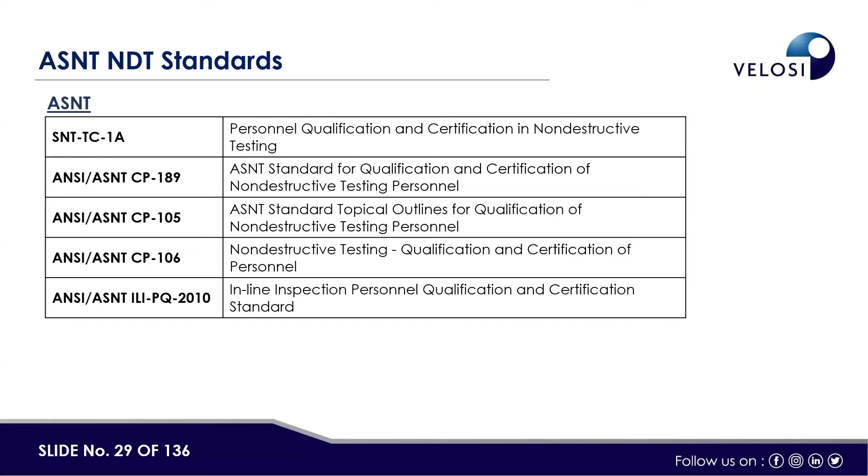And the qualification and certification standard is covered by CP 106. And inline inspection personnel are qualified as per ILIPQ 2010. So these are some of the standards from American National Standard Institute and American Society for Non-Destructive Testing. Basically, they cover some topical outlines and criteria which govern the training and certification of the people who are going into the industry performing the testing on different and various techniques.

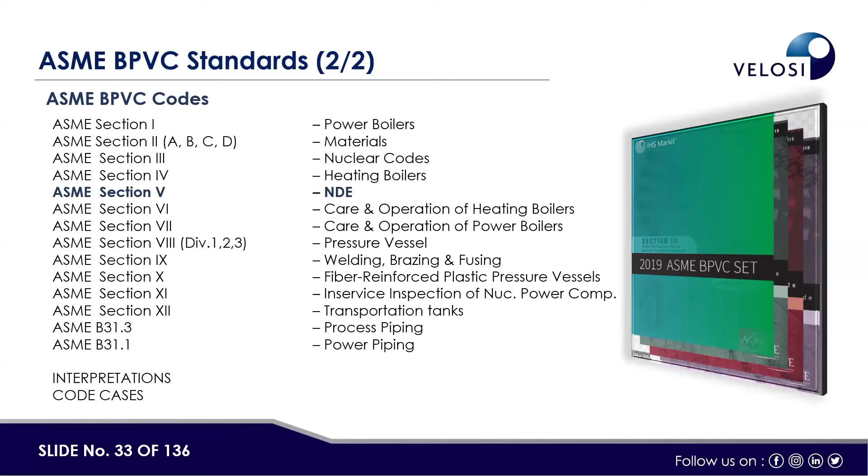Section 9 specifically deals with the welding, brazing, and fusing processes. Section 10, fiber reinforced plastic pressure vessels. Section 11, in-service inspection of nuclear power components. And Section 12, transportation tanks, and B31.3 is for process piping, and B31.1 is for power piping. There are 11 or 12 different standards involved in the B31 series. They all cover different aspects of the piping system.

There is a general overview for Section 5. We will go through this. Section 5 specifically deals with the routines and, what would you say, regimes of different non-destructive testing methods. Non-destructive testing, as you might be aware, or I'll try to enlighten you, deals with some physical phenomenon which we try to use to our advantage without destroying the test object's future usability. So whenever non-destructive testing methods, which are various in their application, definition and types, are used in the industry, they are governed by ASME Section 5, as we will go in detail later in the session.

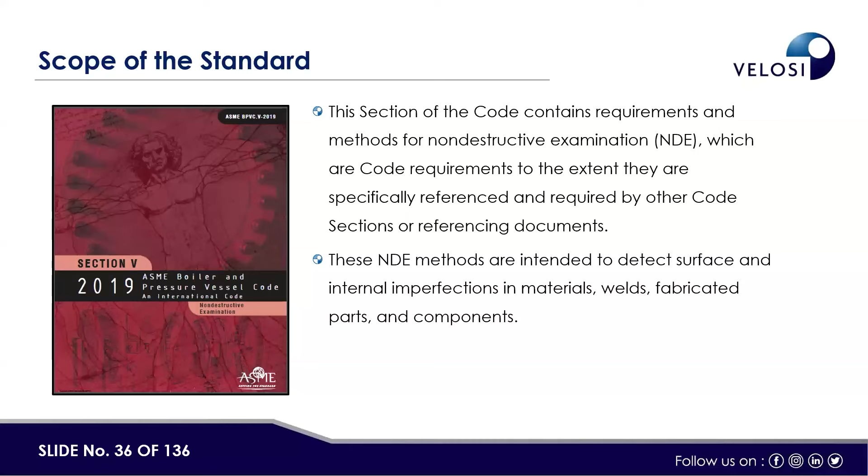Some of the well-known non-destructive testing methods which you might have heard about already in the industry are acoustic emission, adaptive total focusing method, ATFM, which is a subpart of PAUT nowadays, or you can say an associated technique, which is very advanced and very latest. AUT is automated ultrasonic examination. ECA is eddy current array. This is comparatively new also. EMUT, encoded manual ultrasonic examination. This is normally routinely done in every part of the world.

Electromagnetic eddy current testing. This has various further branches also. Leak testing, like you guys must have seen vacuum box testing or hydro testing. These are both part of leak testing. MT is magnetic particle, NDE is non-destructive examination, PT is penetrant testing, RFT is remote field testing, RT stands for radiographic testing, ultrasonic testing is denoted by UT, and visual testing is denoted by VT.

Acoustic emission is the class of phenomena whereby stress is applied to an asset, like a tank or pressure vessel or LPG bullet or LPG sphere. When an asset is under operation or in service, there are certain stresses involved, and those stresses, when they transit, generate ultrasonic waves, which are turned into audible sounds by using different equipment. This whole phenomenon, when applied in the industry for detecting those emissions generated by an asset under stress, is called acoustic emission testing.

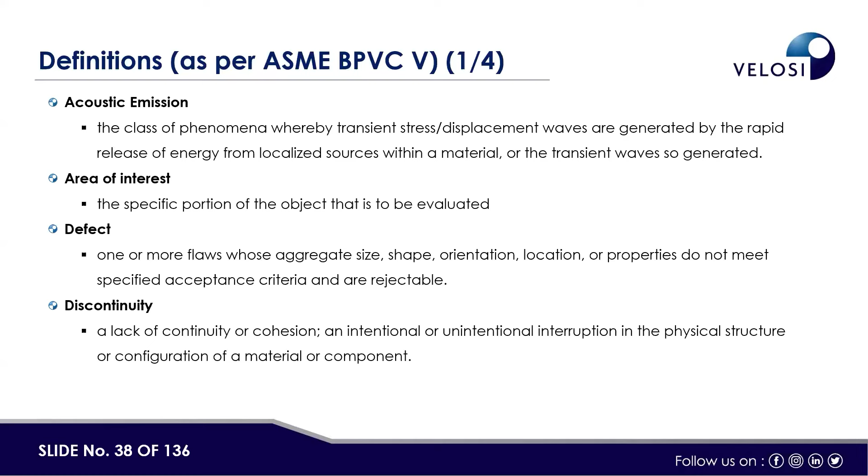Eddy current testing is a non-destructive test method which uses the current induction principle, which we will explore later in the presentation. False indication could be a result of the behavior of any test object, or its properties or its characteristics, with the medium of the test which is being used to identify some of the properties. This interaction generates some indications which are not actually coming from a discontinuity, but rather from the geometry or properties of the material. So these indications, when evaluated, are classified as false indications.

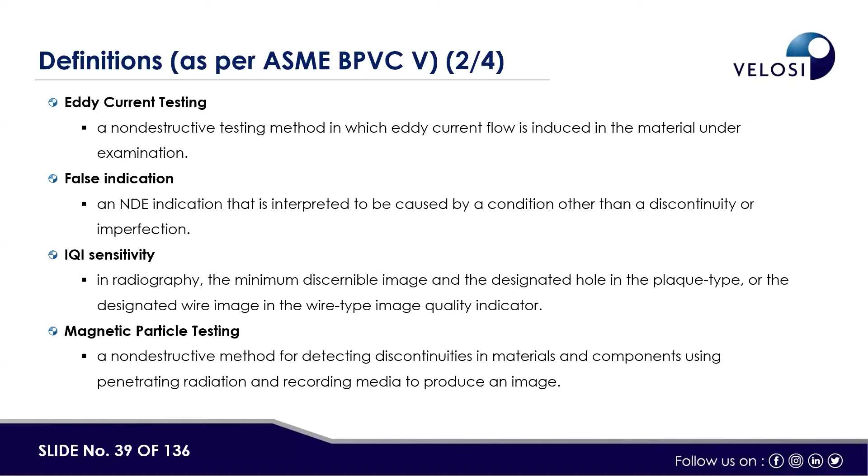IQI sensitivity: in radiography, image quality indicators are used to identify the quality of the image being generated by any radiograph. Magnetic particle testing is the use of magnetic properties of a material to detect any discontinuity or defect in it. Time of flight diffraction is a testing method in which we use high frequency ultrasonic waves, and the time it takes to transmit from one end of the object to the other and come back is the total time of flight.

Ultrasonic is a form of mechanical vibrations which we use in higher frequencies to test objects. Visual examination is to see an object to evaluate its condition. It's a visual examination. So I hope you guys are alongside with me until now. We are trying to dive deep into the subject from here on with an introduction.

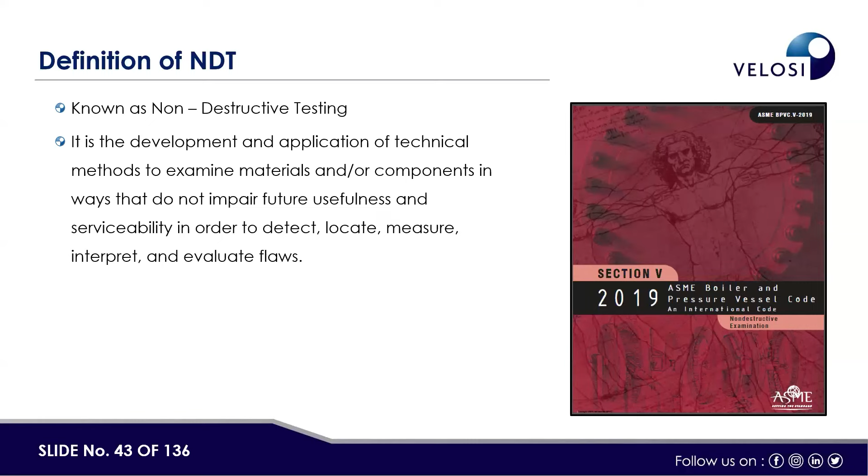Definition of non-destructive testing. As I have earlier touched the subject a bit, when we test a material or a component to ascertain its future usefulness and to assess its properties without destroying the test object itself, and also without disturbing its future usefulness. Any method of testing which fulfills these different criteria already laid out has to be classified as a non-destructive testing method.

When is NDT needed? In my humble opinion, NDT is needed in the entire life cycle of any given asset. From the raw material stage in the mining industry, we need to assess the quality of the ore or the raw material, as this will govern the quality of the end product. So we use non-destructive testing methods to ascertain the quality of the ore or raw material. Then that ore goes into primary processing, or primary steel making. In the process, we apply non-destructive testing methods to ascertain the quality of the primary product, which would be raw steel, ingot forms, slab forms.

Then those primary products go into the secondary processing industry: rolling, forging, casting industries. There, non-destructive testing again comes into play to ascertain the quality of the product and to ensure that no flawed product passes the assembly or manufacturing line. Then those secondary products are formed into the final product, into plate shapes, girders, slab shapes, and various other forms, which are used in the oil and gas industry to manufacture tanks, pressure vessels, piping, and other valve assemblies, and also the structure of the plant, which holds everything together.

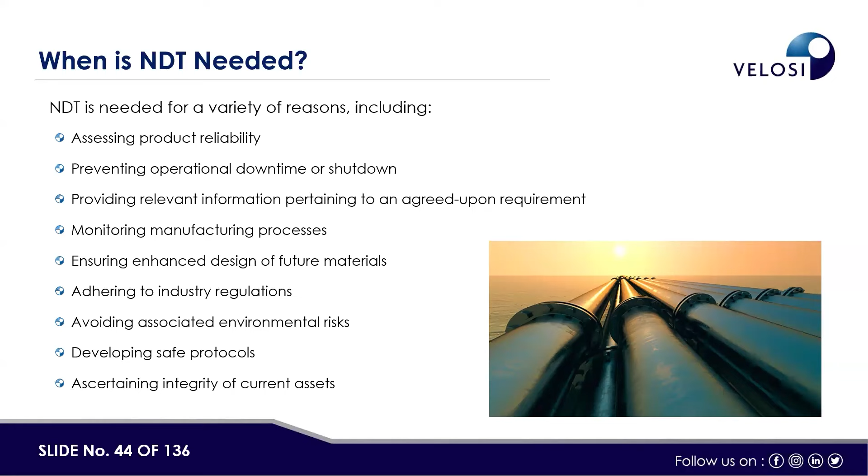So, in my humble opinion, non-destructive testing methods play a very vital role in every step of the life cycle of any given product. Their usefulness begins from the raw material till the finished product, and then back again when the product completes its life cycle. It is turned into scrap, sold and reprocessed again, and the life cycle begins again. So there is involvement of non-destructive testing in every phase.

Industrial application of non-destructive testing: as we have touched already, it's applicable in the mining industry for ascertaining the quality of the ores and raw materials, and the oil and gas industry, where we use it to test and ascertain the health of oil and gas assets like pressure vessels, tanks and piping, etc. It is also used in the energy sector, power generation sector, aerospace industry, heavy engineering complexes, and automobile industry.

Importance of NDT in asset management. So the importance of assets and asset management: how non-destructive testing plays its important role in managing the asset life cycle. When we operate oil and gas plants, we know there are multiple assets involved, and during the process, we tend to get aging of the assets and also service-induced defects. So if we run our assets to failure, it will have a very adverse effect not only on the operational efficiency but also on the life of your plant.

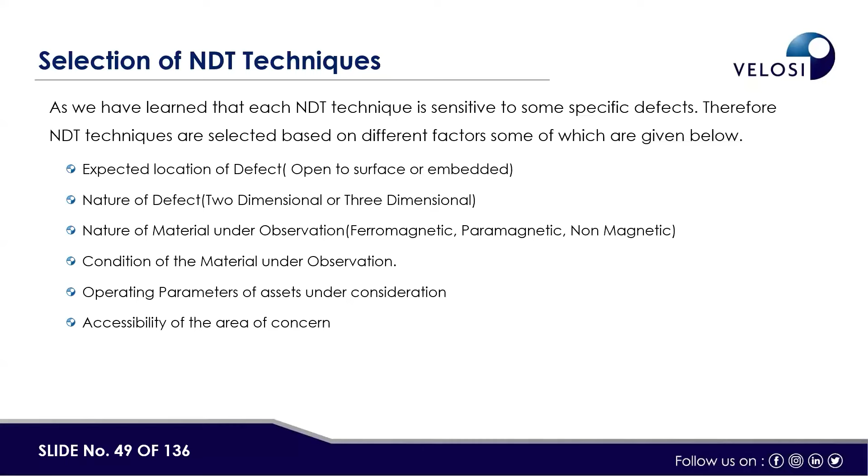What are the different advantages of non-destructive testing methods? As we have gone through already some of the key points, in the majority of testing conditions, we do not have to take the asset off stream.

It remains on stream, and we can test it without any adverse effect to the results being produced. It can help you plan your shutdowns and reduce your shutdowns. How can it reduce your shutdowns? It can plan your maintenance work before. You know the condition of your assets beforehand, so you can plan your maintenance runs accordingly. So no surprises in terms of failure of any asset, in terms of leakages being observed unknowingly, unplanned, and shutting the plant down for maintenance work.

So it can reduce the downtime of your assets, because now you can have planned maintenance, safety of the assets and the operators. If your assets start to fail without warning, or without you knowing prior, those are not only dangerous for the production, for the asset, but they are also dangerous for the operators which are operating in the near vicinity.

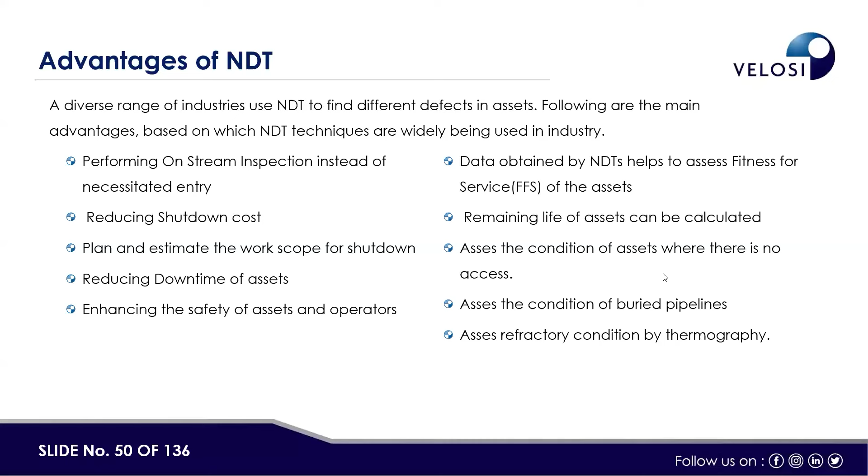Okay, let me get through this. Limitations of non-destructive testing techniques. As I have already touched the subject, there is no non-destructive testing technique in the world as of today, I know, which could claim that it can provide answer for every situation. This is the first and foremost reason why there are so many non-destructive testing techniques available to select from, because every technique has its own set of applications and its own set of limitations.

So when we sit on the chair and try to make decisions about how and what we need to do when it comes to non-destructive testing methods, the questions we ask ourselves, we have already gone through them. Those are the questions we ask ourselves because there are so many techniques available. So sometimes the questions we ask ourselves are more of the economics part than the technical part. So the economy of the testing is a very major factor also. If a condition could be tested very economically with a very simplistic approach and very conventional method, it is not absolutely necessary to go with advanced NDT techniques.

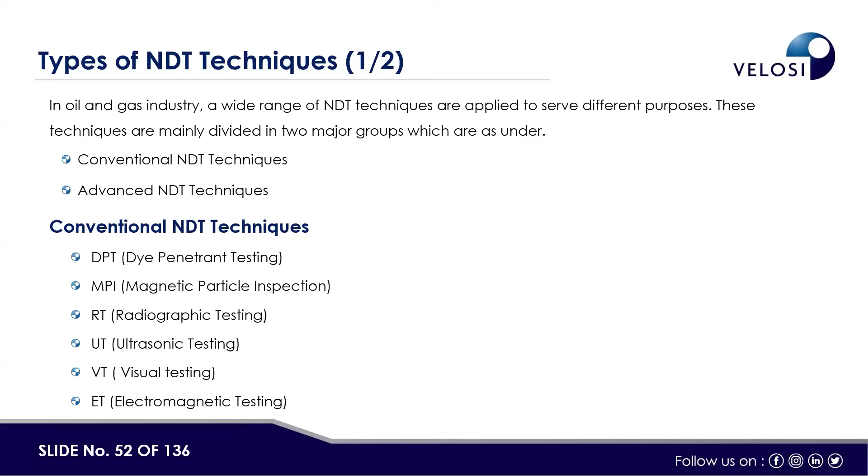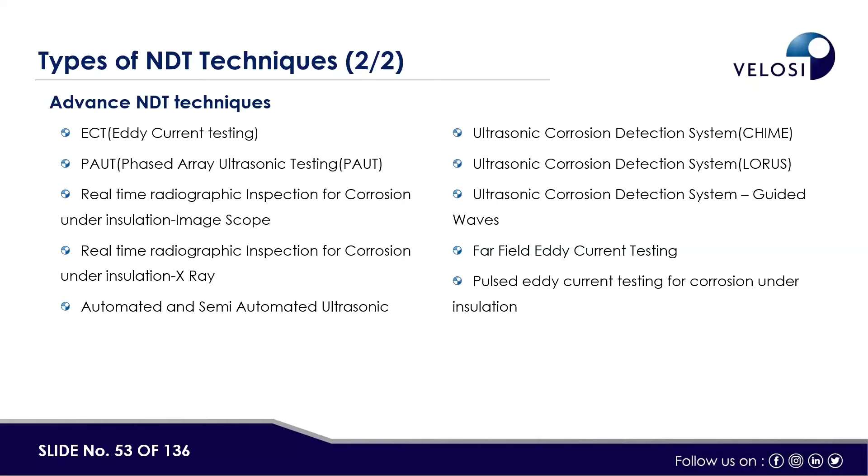And in advanced NDT techniques, we have eddy current testing, and we have phased array ultrasonic testing. We have real-time radiography. We have automated or semi-automated ultrasonic testing. We have CHIME, which is creeping head wave inspection method. We have LORUS. We have guided waves, alternatively also known as LRUT in the industry. We have far field eddy current testing. We have near field eddy current testing. We have so many other non-destructive testing techniques which we will go through today.

So the conventional part: dye penetrant testing is the simplest of them all. It is actually a direct aid to visual inspection, which we are all aware of. When we visually assess the condition of any test object, like wear, tear, misalignments, very large cracks, paint removals, blistering, these sorts of findings we usually detect and evaluate based on visual observations.

But sometimes we need some help to enhance the visibility of any given situation or any given indication or any given discontinuity. We suspect it to be present there, but we are usually unable to resolve or visualize it very visibly. So we need an aid, a help from a testing technique which would enhance its visibility, which is the specific case for dye penetrant testing. It's just an aid to visual inspection. It just helps very small defects to be seen, or their visibility to be enhanced, to be seen easily.

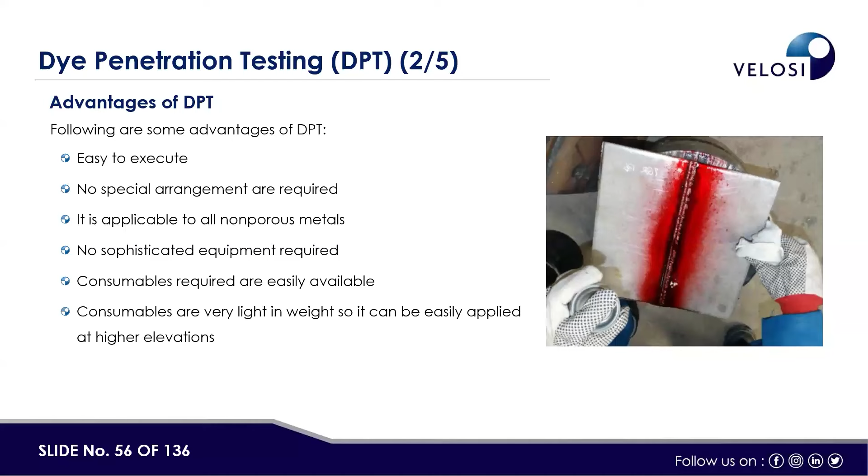It is very easy to execute, where no special arrangements are required. It is the simplest of non-destructive testing techniques. So the training required for getting certified and acquainted with non-destructive testing like DPT is very little. Regulations are not that strict. It's easily doable. No special equipment is required. It is a very mobile, portable test instrument. You can have three or four cans alongside, and you can take them anywhere you want. It's also easily available, and very cheap to be done. So these are some of the advantages of this non-destructive testing.

There are also some limitations: this method cannot be applied to porous material, as it would trap your penetrant and render anything present unseeable, unresolvable. Surface preparation required is at times, not always, very extensive. Consumables which are available are highly flammable. They are usually available in the form of an aerosol can. And you also need to provide proper ventilation if you are doing this in confined spaces, as the consumables are also rated as carcinogenic on their labels. So you have to take some safety precautions for yourself.

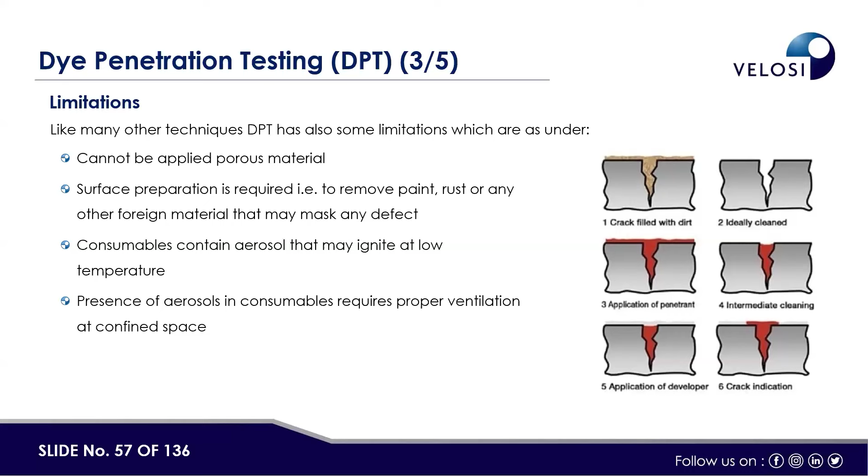You have to cover your breathing orifices, so that you do not inhale these consumables, and you also have to cover your hands and skin so that you do not come in direct contact with the consumables. Otherwise, it's very safe to operate. Dye penetrant testing is very reliable to detect surface defects, those discontinuities which you are trying to detect through application of dye penetrant testing, or liquid penetrant testing as it is alternatively known. It depends on the location of the defect. So the probability of detection for liquid penetrant testing is directly dependent on the defect's openness to the test surface.

If the defect is not open to the test surface, DPT might miss it because it needs an opening to penetrate. If that opening is not there, DPT remains of no use in that situation. So if the defect is open to the surface, and the test object is not porous so that it may absorb the penetrant material, your probability of detection for dye penetrant testing would be highest.

And if your defect is not open to the test surface, the probability of detection for dye penetrant testing will remain at its lowest. So, as I have already told you, the accuracy or probability of detection for dye penetrant testing relies on the condition of the test object, specifically whether the defect or discontinuity is open to the test surface or not.

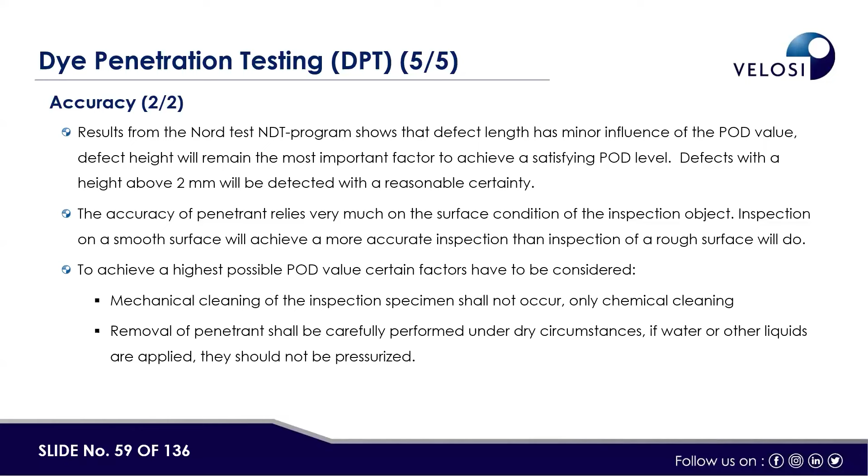Radiographic testing is most widely and commonly used, and it's one of the oldest testing methods in the industry. Usually it is used to detect cracks, trapped air which is called porosity, foreign inclusions, thickness measurement, and profile radiography. These are some of the key applications of radiographic testing, but let me tell you, this is not where it ends. These are some key applications.

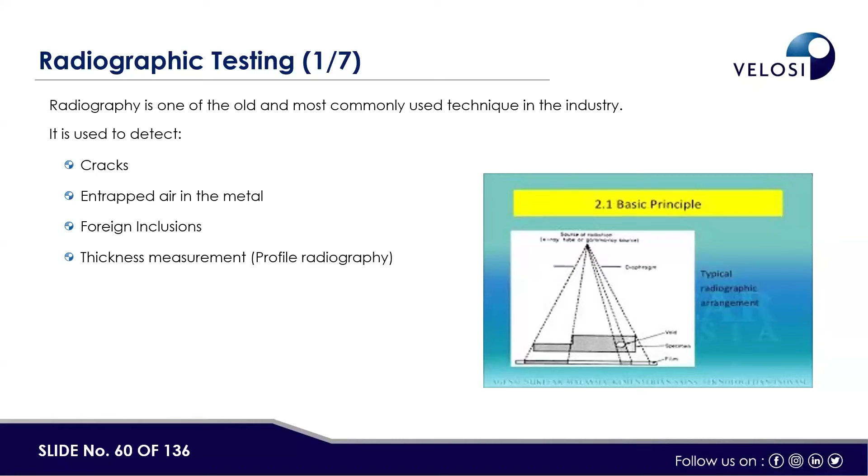Radiographic testing uses some sophisticated tools, as we have seen in case of dye penetrant testing the need for tools is not very much. So when the need for tools is removed from any testing regime, it becomes less costly. The more tools are involved, the more the cost goes up. So the economy of any testing depends on how many different tools and consumables are being utilized to get the result. One key consideration when deciding which non-destructive testing method to apply is the economy of the test. If it is too costly for getting results, it would be of less utility.

RT uses radioactive sources. Radioactive sources could be naturally occurring, in the form of cobalt or iridium-192. There are different naturally occurring radioisotopes used in the industry, and also artificially generated X-rays, produced using X-ray tubes. Then we need X-ray films which get exposed from the X-rays and generate a counter image or mirror image of the object being tested. Then we need IQIs, which are image quality indicators. Then we need densitometers to ascertain if the density of a radiograph is achieved or not. Then we need film viewers to view those X-ray films for evaluation and interpretation.

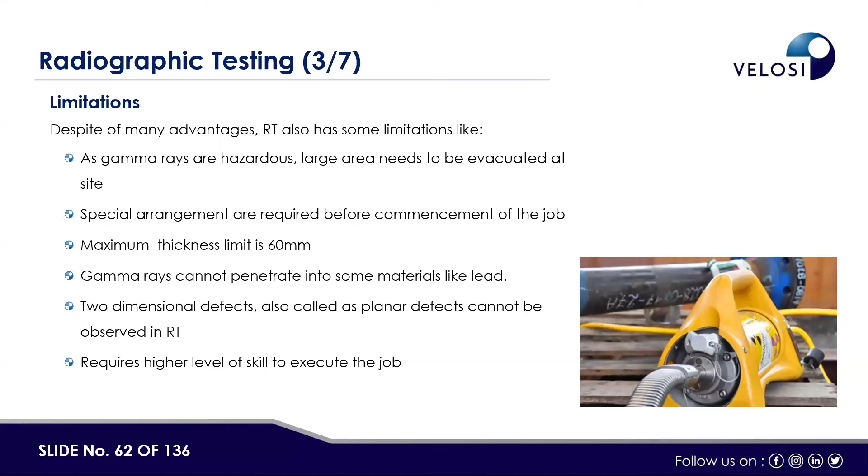It is a tight walk. So to walk this tight walk, we need very skilled and very trained operators to handle these sensitive equipments and to carry out these sensitive jobs, which is oftentimes not permissible in certain situations. So there are other test methods to be considered.

Accuracy or probability of detection - as we have gone through the applications and limitations of radiographic testing, we have come up to some limitations which depend on the density of a given material to be tested. In terms of thickness, we have seen there are some limitations. In terms of application, we have seen there are some limitations. So whenever a set of limitations is introduced into the testing system, the probability of detection goes down.

In case of radiographic testing, generally 0.3 millimeter can be detected using conventional radiography in steel. But it depends upon the wall thickness, it depends upon the density of the material, it depends upon the geometry of the material also, it depends upon the content of the object also - if it is filled or empty, and if filled, what it is filled with, what is the density of the medium.

The type of defect you are trying to detect is the primary question, as we have spoken already. It is all important to know if it could be detected with radiography or not. So the primary question when we ask ourselves what method is to be applied is what are we trying to look for. If we are looking for some shallow defects which are open to the surface, very fine, and it's a very dense material and very thick material, naturally we would refrain from going to hit it with the radiographic source.

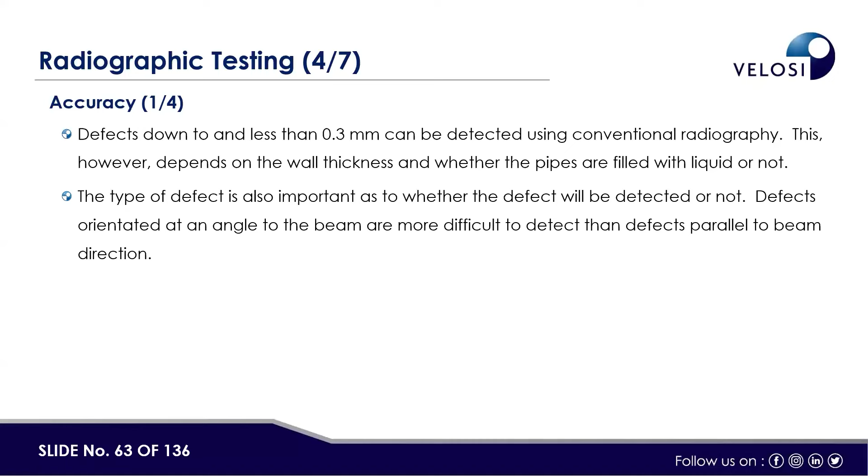The very important thing to know is there is no single technique in the world which can answer every question. So you have to ask yourself, what are we trying to look for? What are we trying to find the answer for? That question would bring up most of the answers itself.

So again, the POD curve for radiographic testing goes down with the density of the test object, the thickness of the test object, the radiation frequency you have got - either it's X-ray or gamma ray - and the radioactive source also, either it's IR-192 or cobalt. So there are many different factors to consider before providing a judgment upon probability of detection on any given NDT technique.

In case of RT, it depends upon density of the material, thickness of the material, the material itself, what you are trying to find out, and what the specs require you to achieve in the first place. Either you can achieve it successfully or not, either you are able to protect yourself from excessive exposure to ionizing radiation without compromising the quality of the test. So these are some of the factors which determine the POD for radiographic testing.

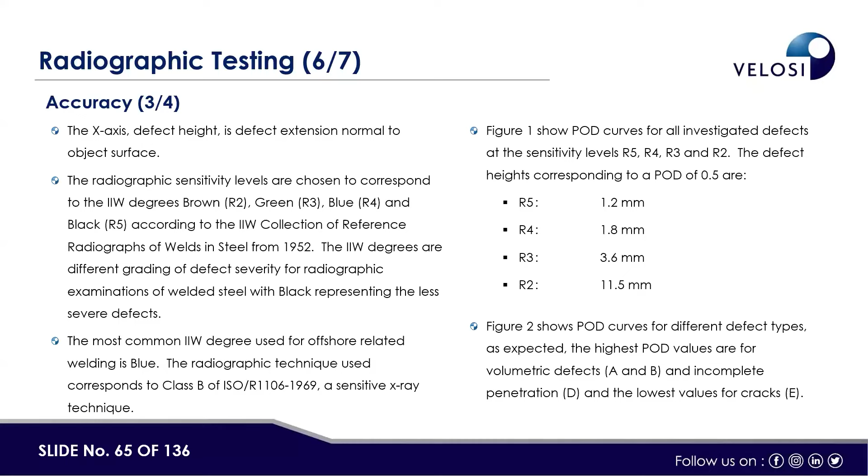And these are the explainers for those POD curves. These are different situations being posed to the radiographic testing regime, and the probability of detection with the change of one single parameter - the change in the probability of detection - is being explained here in this slideshow. You can refer to it again.

To achieve the highest possible POD value, as you have already gone through the subject, you need to have a certain set of information predisposed to you before you get to the testing job. If the acceptance criteria is very strict, you will have a higher reporting level. Obviously, the more indications you record, the more you have to report, as the acceptance criteria requires it. Again, as I have told you already, it depends upon the specifications you need to follow, and it depends upon the film quality required.

And the specs require you to maintain a certain degree of density without compromising the visibility of a certain diameter of wire in a given IQI. If those specifications are very strict, it becomes even more difficult. Also, the type of radiation being used, and the object under test.

So this slideshow tells you the amount of restrictions and limitations you add into the testing system - its POD will go down with each introduction of every limitation. So if you are adding limitations fold by fold, the POD is going down fold by fold.

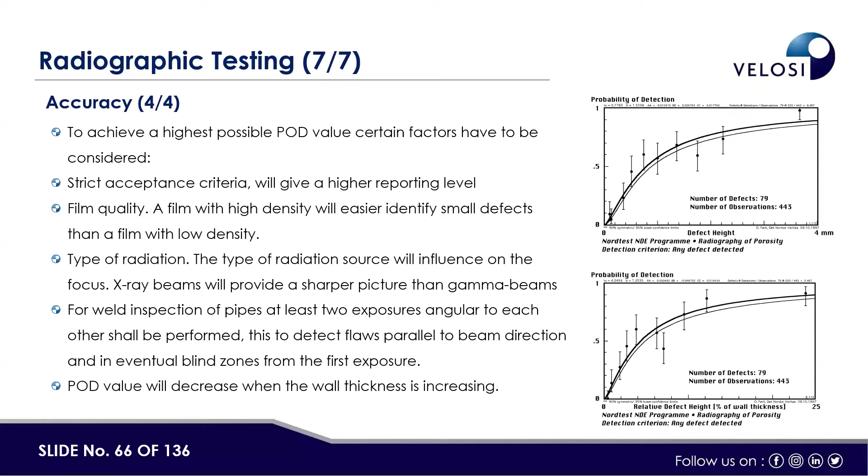Now, our next testing technique is magnetic particle inspection, MPI or MT, as alternately known in the industry. It is one degree above dye-penetrant testing in terms of simplicity - or you should term it below, because it involves some degree of equipment more than DPT involves. So it gets a bit more complex and compounded. It requires a greater degree of training to handle, because of the involvement of some specialized equipment to be used.

So we induce magnetic flux into a ferromagnetic material. That magnetic flux tries to flow through the material, and given the permeability of a given material is uniform within the material, if there is some resistance to that permeability or resistance to the flow of the magnetic flux, the flux lines would try to bend their path to choose the path of least resistance around that resistive boundary.

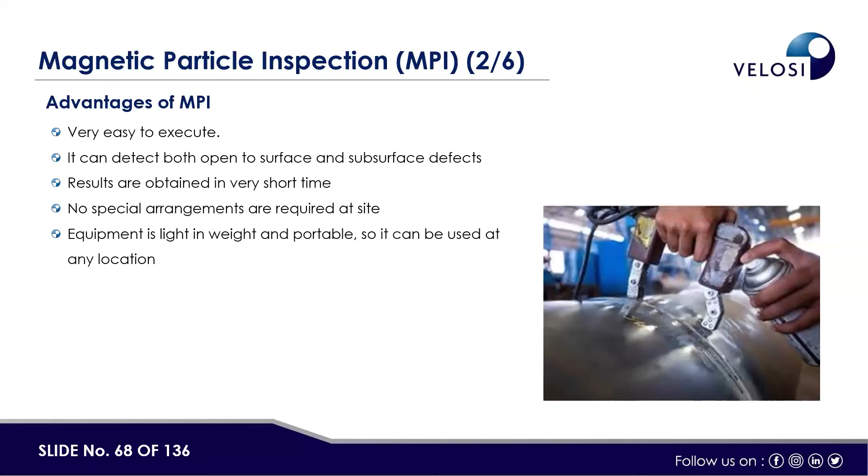There are also some limitations associated with magnetic particle testing, as there are advantages. Calibration of the instrument is sometimes required. It can test only ferromagnetic materials, as you need a material which responds conducively to an external magnetic source. The operator needs to be skilled not only in operating the equipment but also in evaluating the findings you get from MT.

Surface preparation is oftentimes required, but it is not as strict as it would be for dye penetrant testing. You sometimes need to remove layers, if present, which could interfere with the propagation of magnetic flux into the object. If electroplated objects are to be tested, you might need to remove the electroplating first. And as we have already discussed, in certain situations you might also need a power supply on site.

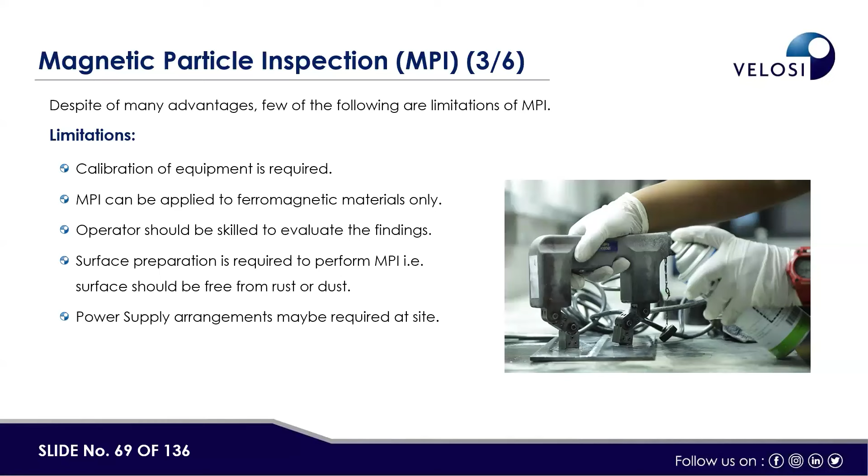So the POD, again, is dependent upon the mix of advantages and limitations present on that actual work day, on the actual test object. If it is more prone to the limitations, then POD goes down, and there is no point in using a technique which has very limited POD for a given situation. If the number of limitations present on site or on the test object is very low, then the POD goes up drastically.

So as with any other NDT technique, the POD for MPI is dependent upon the mix of application advantages and limitations available to you on the day, with that object under testing. That would determine what actual POD is available to you to operate with.

The ability of detecting defects depends on two major variables: the depth of the defect, as induced magnetism does not usually flow very deep into the test surface; it sticks to the surface it is induced from. And defect length. Regarding defect height, some specifications tell us that if a defect is more than 2.5 millimeters deep into the ferromagnetic material, you cannot detect it using MPI.

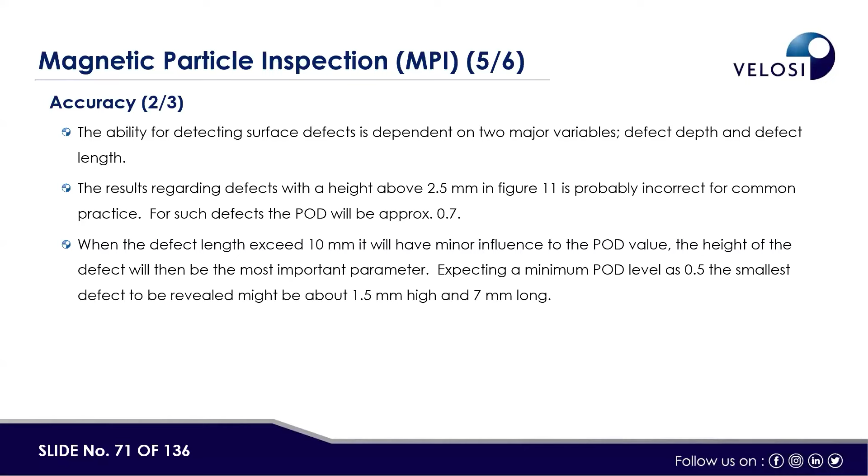If defects pose very little resistance to the flow of magnetic flux, you might lose them. If the defect is oriented parallel to the direction of the magnetic flux, you might miss it. So POD depends upon multiple parameters. It is not a simple number to write somewhere. It has to be calculated for each given situation on the day.

So as an example, we have provided you with one situation and calculated its POD. But for any given test situation, you have to go through and calculate and estimate the POD for that specific test object on that specific day with your specific set of equipment.

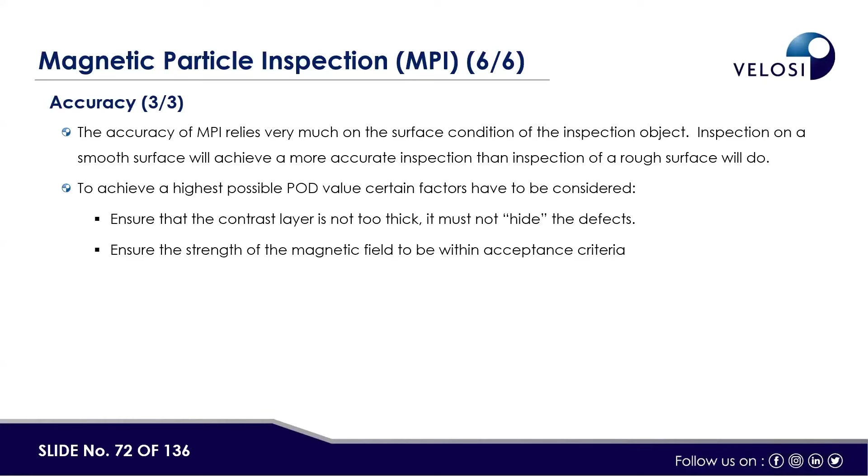So, gentlemen, we are through to 73 and almost halfway, including Miss Aisha's intro also. So I'll take the credit for coming to the halfway myself.

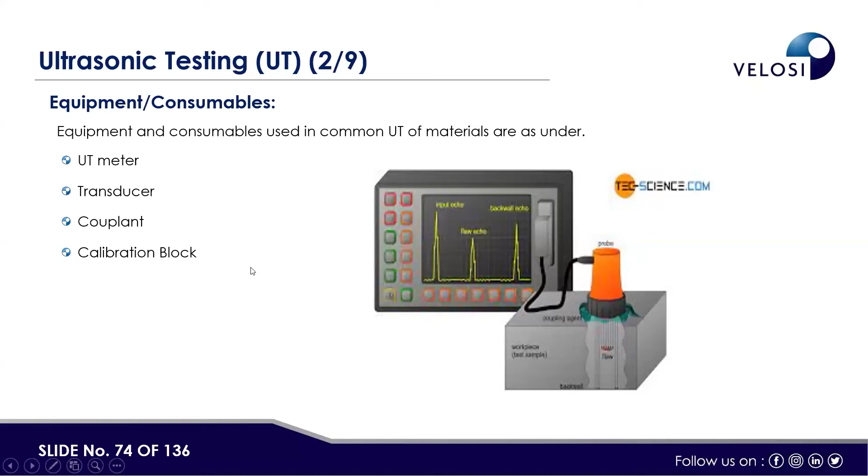Advantages of ultrasonic testing. It can be almost applied to any metal or any material. If I say any material, that would not be that far off from the reality. UT works equally on high temperature surfaces, but obviously with some precautions. UT has working range in terms of thickness of material, yes, but with some certain tweaking of the package.

UT can effectively identify in a three-dimensional plane. Yes, RT cannot provide you with the information regarding the height of the defect, but UT can. UT can be deployed to verify or to counter check performance of other NDT techniques also.

Results are readily available, or I must say the results are real time actually, as the decision is being made on the spot. The equipment is very safe to operate. It has no ionizing radiation. It is battery operated, compact, very mobile, very handy to carry around. So it is very friendly to operate in field activities and very friendly to operate in remote locations.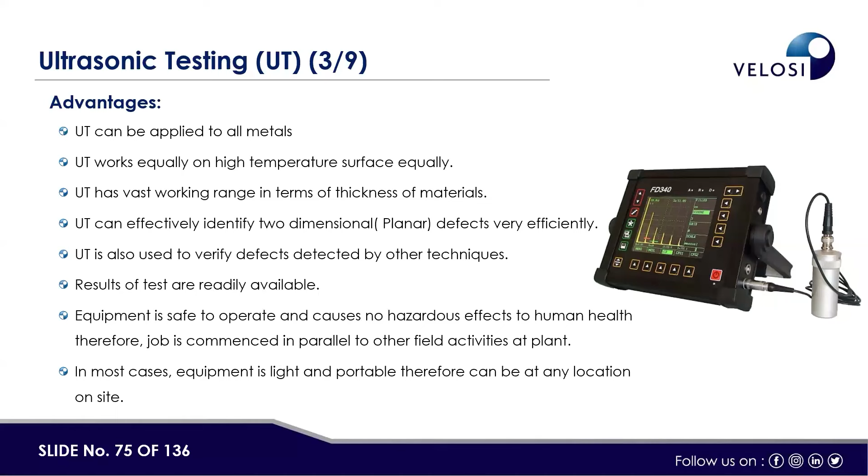It is very portable, so you can get it inside a pressure vessel, inside a tank, and get your testing done from any location. There are also some disadvantages associated with the ultrasonic testing, which is not true that much now. No permanent records sort of thing is not true nowadays, as everything is computer aided, and we can generate almost all records, and we can retain them.

Yes, the skill of the operators matters a lot. You need to have highest level of degree, if not the highest, to operate ultrasonic testing. UT is applied to material. Yeah, with some limitations, this is true. 6.35 mm would be the cutoff limit. If you are lower than this, your ultrasonic testing normal setup would not work. But with the special setups, you can go beyond this.

And frequent calibration, it's not actually a frequent calibration. It rather would be a frequent normalization of the system to remain sure that you are doing the right thing. So calibration is done once. It could be saved into the system also, but normalization you will have to do again and again. And it is not a requirement of any specification, but it is for self guidance and self correction or self audit that you are on the right track while you are performing the day.

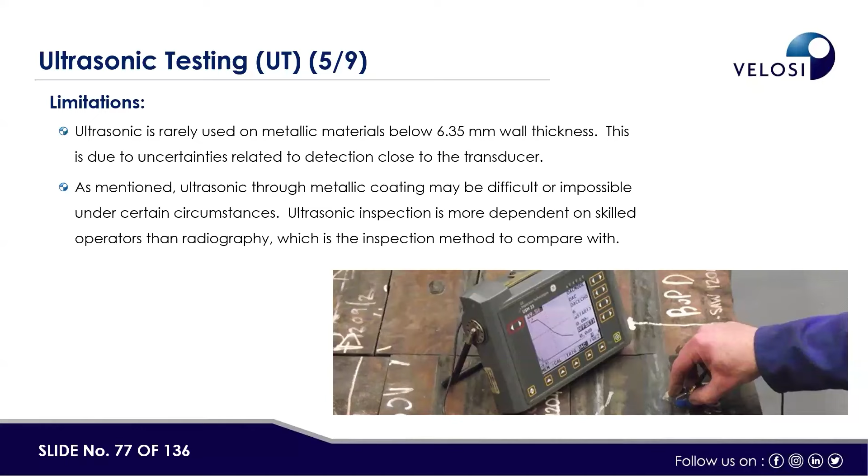If you are testing with conventional setup, conventional ultrasonic testing, and you are facing a composite material to test, it would be very challenging to come up with reportable results, as ultrasonic testing is designed to operate within the realm of uniform materials, and by definition composites are not uniform. They behave differently on different layers, so it would be very difficult to come up with a useful result when you are using conventional equipment, conventional setup to test a composite material.

Again, the probability of detection is very high to begin with for ultrasonic testing systems, and it is also very important to note that the POD for ultrasonic testing methods does not go down that drastically as it is true for other non-destructive testing methods such as radiographic testing and others, as we have already gone through. And also a lot of aid and a lot of variations are available for the operator to overcome these limitations and maintain a certain POD for a given situation in case of ultrasonic testing.

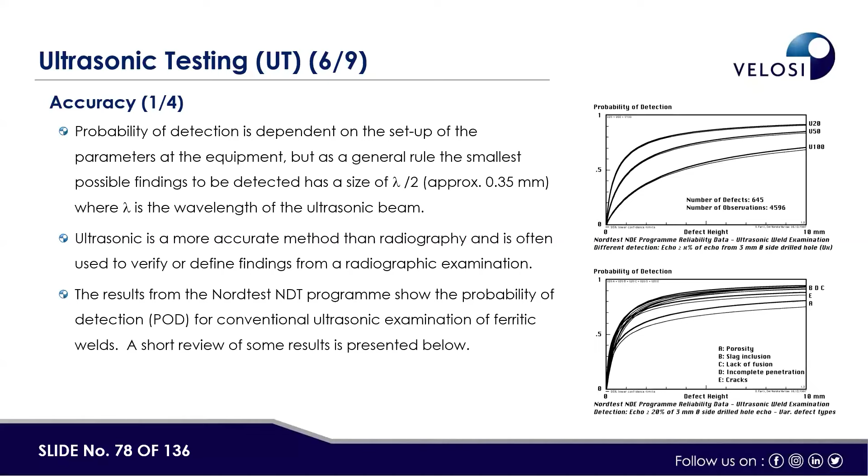So the versatility of ultrasonic testing systems nowadays, and computer aided, and the advancement in the equipment technology nowadays has come to the aid of ultrasonic testing in terms of maintaining proper and balanced and highest POD of any given non-destructive testing method in contrast. So you can test defects as small as 0.35 mm in conventional methods, and up to 0.01 mm if you are using computer aided time of flight diffraction testing, these sort of applications of ultrasonic testing.

One more thing I would like to add, that the majority of the advancement in non-destructive testing methods has occurred in the field of ultrasonic testing. And why has that happened?

Because the advent of the computer and its introduction into the ultrasonic testing realm, and the way it has revolutionized computing, record keeping, and data processing, has led to the revolutionization of ultrasonic testing techniques. We have got time of flight diffraction from ultrasonic testing. We have got PAUT, or phased array ultrasonic testing, from the world of ultrasonic testing. We have got LRUT, alternatively known as guided waves, from the realm of ultrasonic testing.

These are all ultrasonic testing, but they have got help of computers. They have got help of computer processing. They have got help of computer data retention. So they are called advanced NDT techniques, and they have revolutionized the non-destructive testing world as of today, and are still doing so.

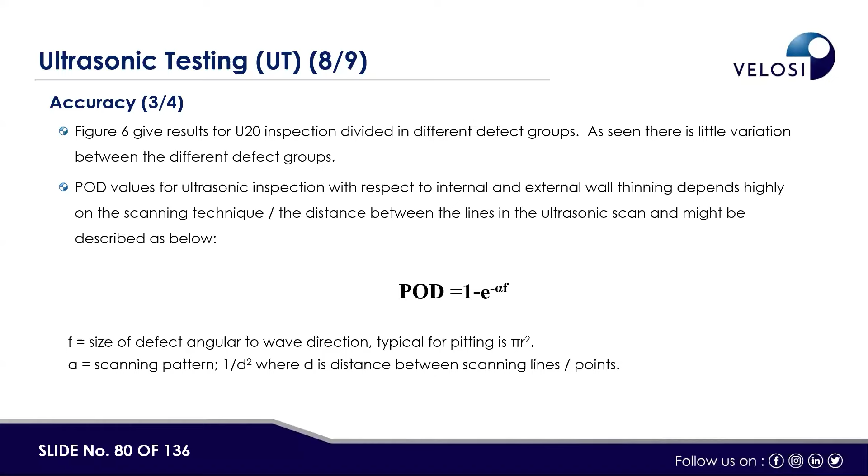So POD of ultrasonic testing is very high. The smallest defect, or sensitivity, is very high. The sensitivity is termed as the smallest defect that could be detected repeatedly. So the sensitivity of ultrasonic testing is very high. Obviously, it depends on the setup you have, and you can increase this and you can decrease this. But in general, compared to other contrasting NDT methods, ultrasonic testing sits on the top shelf in terms of POD and in terms of its sensitivity.

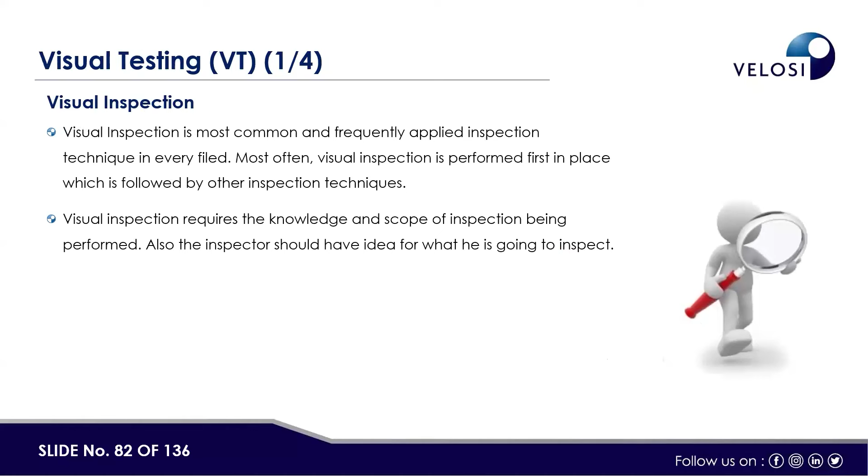So last, I think it is the last in terms of conventional methods: visual inspection. Visual inspection is the use of your two eyeballs without any assistance or very little assistance to see, ascertain and evaluate the condition of any given test object. The prime example of visual inspection would be a walk around your car in the morning. You are doing a visual inspection of your car as you are trying to reach your office or your workplace.

If none of the tires have gone flat during the night, if there is any sign of dripping or leakage or anything loosening up. So this is the prime example of visual inspection. We all do it in routine, almost throughout our days. But I think most of us do not realize that we are doing visual inspection of our assets in routine.

So the advantage of visual inspection is it could be done to any given thing. It could be done to a car, a genset, a pressure vessel, a piping network, a storage tank. Visual inspection can cover large areas very rapidly. You do not need to sit hours upon hours to record observations. You just give a glance. You just walk around for 2, 3, 4, 5 minutes, and you have observed whatever could be observed from the surface.

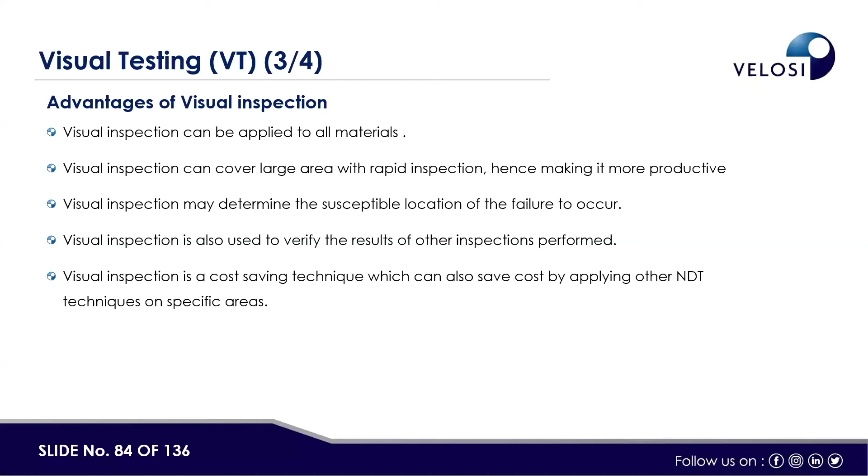It also helps you to determine the susceptibility of the location, which could be the location of failure soon to be. For other inspections being performed, visual inspection can verify their application and their performance also. It is a very cost-effective inspection technique, and I think there is no cost involved in doing visual inspections. You just need your two eyeballs, and you can go around doing things.

So some limitations are also there. As human beings do visual inspections, whatever the limitations of the human beings doing the inspection are, they are also part of the testing on that day. Visual inspection can only reveal the defects on the surface you are visually seeing. It cannot tell you what is behind the wall, and you need to have a good degree of understanding of the process which you are conducting visual inspection for.

Sometimes visual inspection requires some help. For example, you have a very small bore to look from, and a bore scope might come in to help you see through that bore to the other side, to give you a visualization of what lies inside. So the limitation of visual inspection lies within the eyes and the aid of the equipment. As good as your eyes are, and as good as the equipment you are getting for your help, that good your visual inspection would be.

Next is electromagnetic testing. Eddy current examination is an electromagnetic technique and can only be used on conductive materials. So inducing electromagnetic current could only be performed on electromagnetically susceptible materials. Those materials which allow electricity to pass through them are called electrically conductive materials, and only those materials would result in the generation of induced magnetic lines of force.

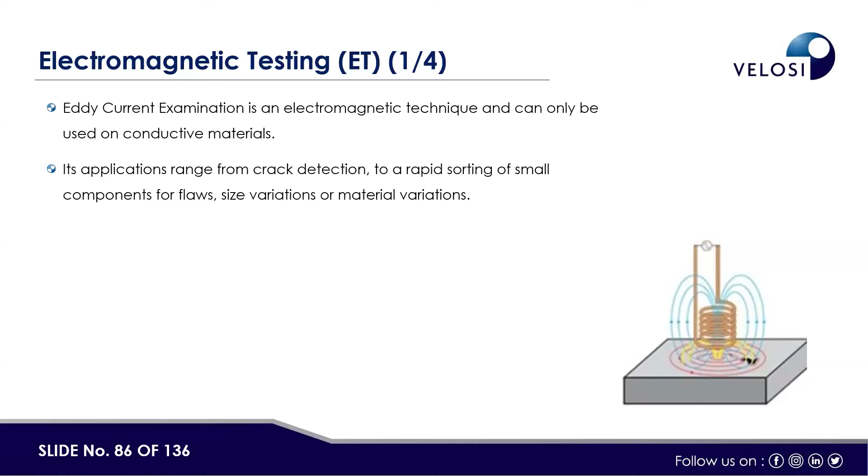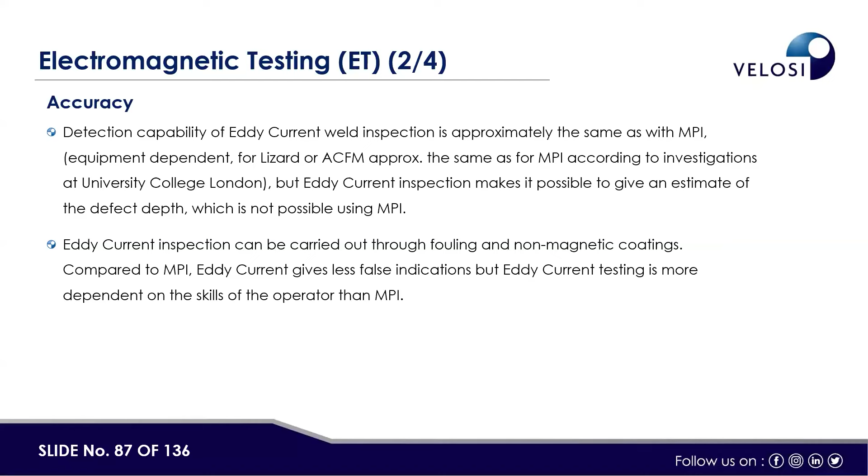Detection capability of eddy current weld inspection or any other eddy current inspection is material dependent, as we have already gone through. If material is not electrically conductive, you might have to make some compromises, which in turn might compromise POD. But at the end of the day, the primary question is what you are trying to find out, and if that thing you are trying to find out is being found out satisfactorily and good enough, that might be the regime good for you.

It's not absolutely necessary all the time and every time that you come up with the optimum inspection results. As I usually say to my clients, knowing something is always better than knowing nothing. So if in a compromised situation you get to know something about your asset and its condition which you otherwise don't know, it always helps in the long run.

So there are some special considerations to be made before we go into doing eddy current testing of the objects. You have to have electrically conductive material. You have to have a non-ferromagnetic coating on it. If a coating is present, you have to ensure that it is non-ferromagnetic. It won't interfere with the induced magnetism in any way.

Some of the limitations are: close to sharp edges could not be tested, as an edge would also behave like an indication itself. Local differences in the conductivity are detectable. That is how we sort materials by using eddy current testing. And the depth measurement and the depth penetration of eddy current is very limited, and it depends upon the material and the frequency of the current being induced.

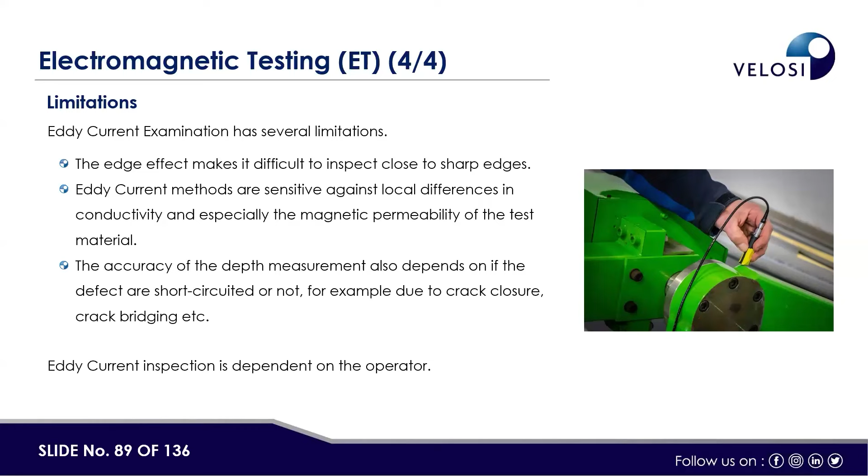So eddy current testing in general application would not be very suitable to measure depths of defects or measure thicknesses of objects. In very thin objects, yes, it could do it, but as the thickness gradually increases, this functionality decreases.

Now we are moving to advanced NDT techniques.

I will ask for 2 minutes to have a glass of water as my throat has dried up. Sorry, everybody. Let's get back to the business.

So, in terms of advanced NDT techniques, we have got quite a few for your introduction today. Some of the advanced techniques are listed here. Real-time radiography, because it has managed to get some help from the advent of computers and computation power, data processing power. Automated and semi-automatic ultrasonic testing, time of flight diffraction, C scanning, guided waves.

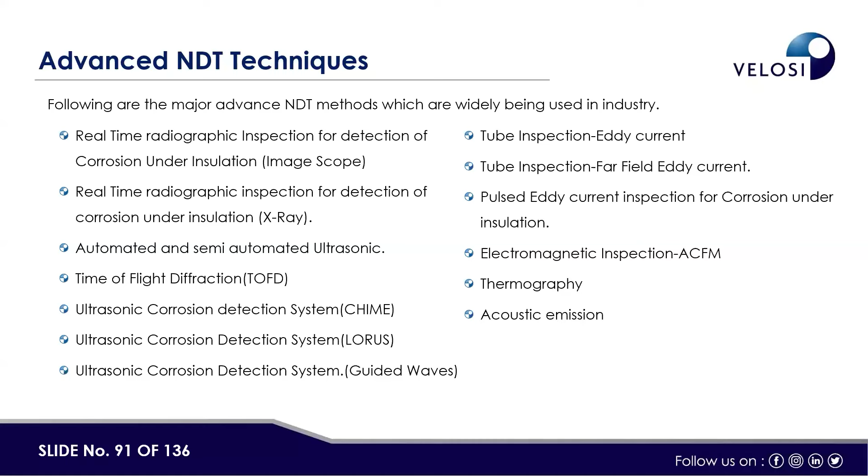As I have already gone through the majority of the examples written here, these are advancements in ultrasonic testing based on the availability of computer power to calculate, maintain and process huge amounts of data being gathered from ultrasonic systems. I think there's some discrepancy in our slideshow; nonetheless, we'll move forward. Real-time X-ray radiography.

In real-time radiography, no film is used, and the result is directly displayed on the viewer or display screen with a very improved quality compared to radiographic film. This is an X-ray based system, so it only emits when it is being energized. In this special case of RTR, the radiation is not supposed to penetrate through the pipe wall thickness. Therefore, we get a profile of the pipe surface on the screen.

What are the advantages of RTR? The main advantage is the safety aspect, as there is no unnecessary exposure to ionizing radiation. So it is safe to operate without associated radiation hazard.

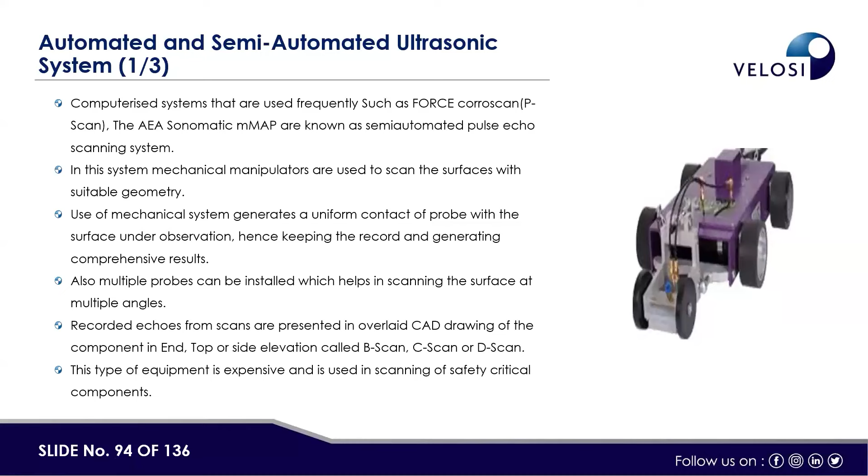So the fundamental function is pretty similar, but the introduction of this automated scanner has improved the functionality or the utility, because an operator without the help of scaffolding cannot go and measure the ultrasonic thickness of an object 13 or 14 meters above ground. So these are the automated systems which we use to get the type of help required to get those types of tasks done.

What are some of the advantages of using semi-automated and automated ultrasonic system?

The main advantage, as I would repeat, is the use of computational power of computers, data processing power of computers, and maintenance of a digital record of the inspection we have carried out. This is by far the most beneficial advantage of automated systems in non-destructive testing.

In some cases, when assets are at elevated temperatures, human beings cannot interact with those assets or come closer to them. Some specialized scanners are utilized, automated in nature, and instead of a human being, those scanners go to the asset and conduct inspection on behalf of a human being without getting damaged, as they are specifically designed for those extreme environments.

AUT is also very rapid in its scanning speed. It also provides additional details as the computational power of computer is available. You can manipulate data and extract additional aspects and information to use in other advantageous environments.

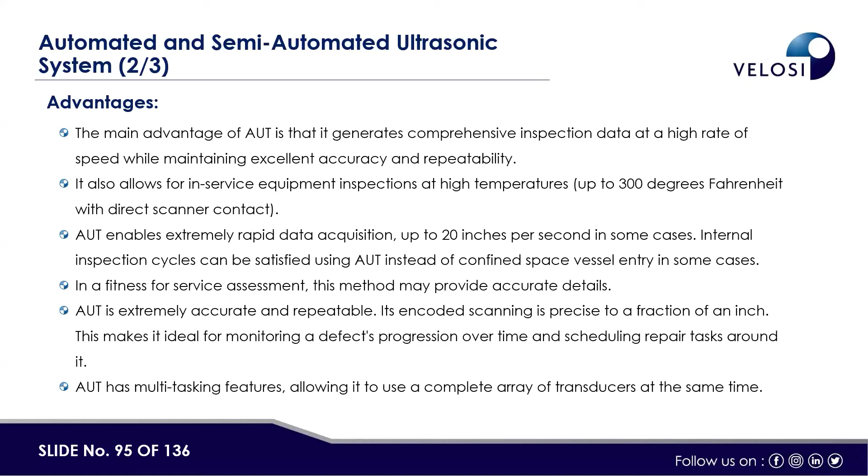It's extremely accurate and extremely repeatable. You can repeat your test again and again on a given situation, and also use the computer's power to keep track and monitor the record of propagation of any given defect for a certain period of time, a year, sixteen months or so, to establish the growth rate of a given damage mechanism, whether it's corrosion, erosion, or a propagating crack. You can maintain the log of that propagation for prediction of future usability.

Some limitations are also associated with this, as with most NDT methods. It has multitasking features, complex scanners, complex computer systems, and complex multiple parts involved, so it gets complex for the operator to handle sometimes, which can lead to human errors. This is the foremost limitation of automated UT.

Next is time of flight diffraction, or TOFD. TOFD is a pitch and catch method, in which we flood the part with ultrasonic energy, and if there are any defects present in that material, they would start behaving like ultrasonic sound emitting sources themselves. Those emitted sounds, or vibrations generated by the defect itself, are detected from the receiver's end.

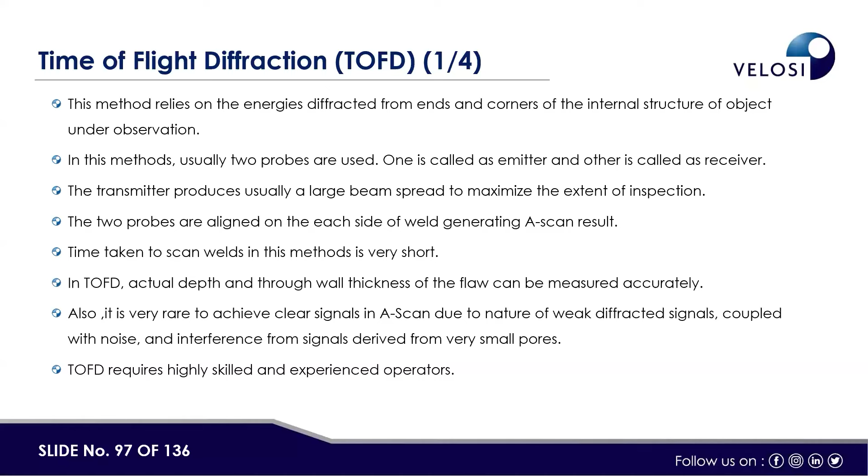Time of flight diffraction is not orientation dependent like other NDT methods, as it does not rely on reflected signal. Rather, it depends upon the detection of diffracted signals, so it is independent of defect orientation. This makes it very reliable and very accurate in its defect sizing and positioning.

This is also an advantage of time of flight diffraction against some other NDT methods, specifically other UT methods such as pulse echo or PAUT. They rely on detection of reflected energy, but TOFD does not rely on detection of reflected energy. It relies on detection of diffracted energy. So it is very accurate in sizing and very accurate in predicting the position of defects. It has the highest probability of detection in any ultrasonic based testing method.

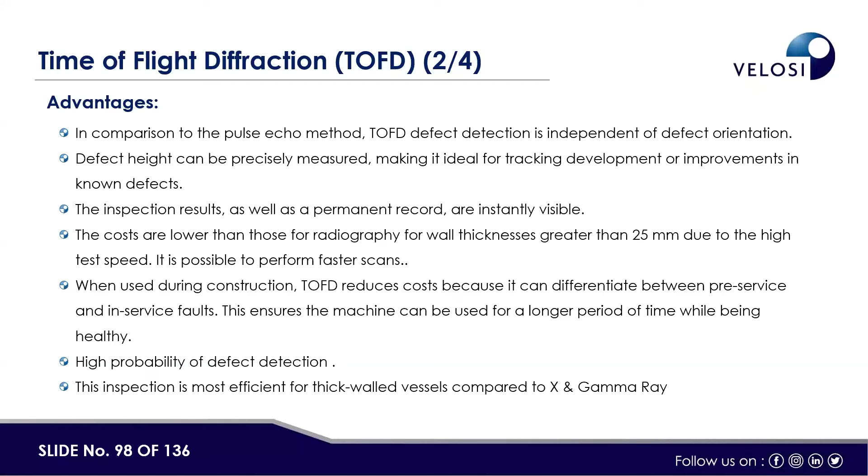So it is very efficient. If you pitch it against X-rays or gamma rays for weld investigation, it far exceeds the effectiveness of X-ray systems in terms of detection and sizing.

There are some disadvantages associated with TOFD also. It only works with very fine grained materials, as it is a very high frequency application. If you have a coarse grained material, the background noise generated by the grain boundaries would render the results unreadable, so you have to have very fine grained materials in the first place to test them with time of flight diffraction.

As per some specifications, TOFD is limited from being applied on thickness ranges below 6 mm. And as per some specifications, the thickness is 13.5 mm, which allows application of TOFD.

TOFD has the highest accuracy in wall sizing and crack sizing, and it has the highest probability of detection (POD) of any given NDT method. Next is our creeping head wave inspection method, or large area scanning method.

This is also a pitch and catch method. It is used to screen large objects for the presence of wall losses or other associated damages. This is especially applicable in areas that are hard to reach or unreachable by other techniques, such as direct contact methods. The prime example is the area directly underneath a saddle support of a pressure vessel or LPG bullet, which remains untested by any other method requiring direct contact to the test surface.

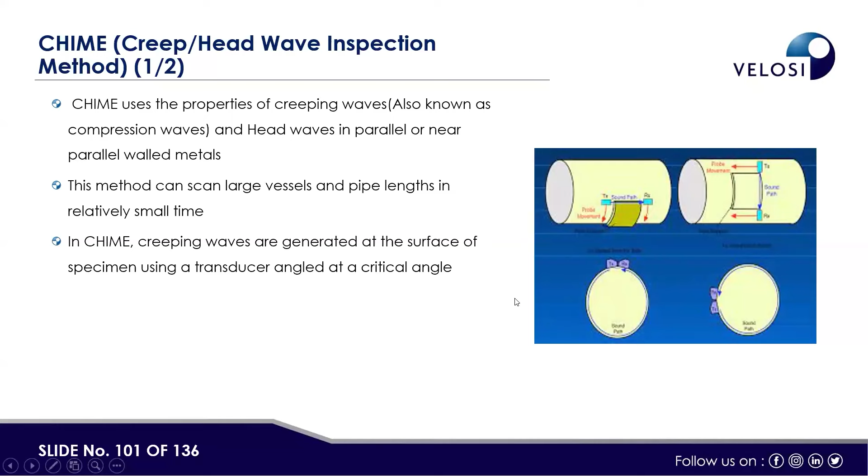By applying this method, you can assess the condition of the object under the saddle support, and specifically locate any area of interest if you find one. Then you can plan your offstreaming of the pressure vessel and address that specific area for the presence of any defect or any serious threat to the integrity of the asset that way.

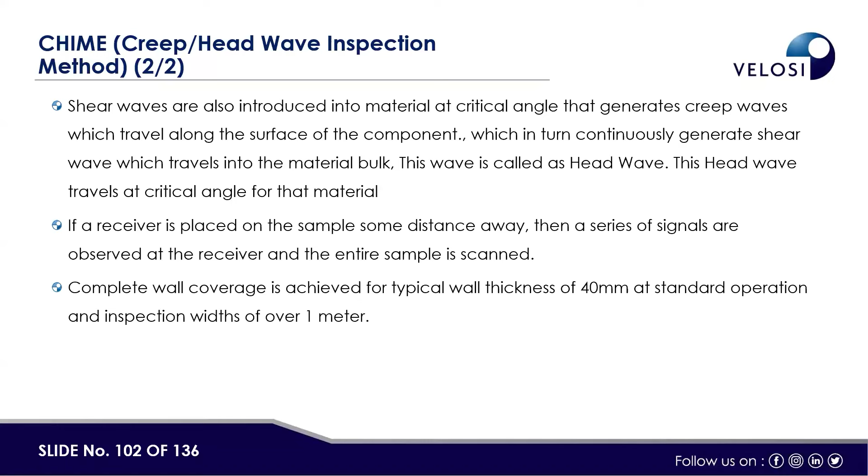So how does it work? At a given instance, shear waves and head waves are introduced into the material bulk as a bulk wave. They follow the critical angle along the interior and exterior walls of the material, and at the receiver's end, when they are received, the lost energy is calculated, which is constant for a sound material. If that lost energy is above that constant, it is perceived to be the presence of a feature that has caused the additional loss, and the amount of energy loss is then converted into the percentage of wall loss or percentage of cross section that has changed in that circumstance.

Then we have long range ultrasonic testing, alternatively known as guided wave testing. It is again ultrasonic based testing that uses lamb waves or plate waves. Help of the computer is available, so we can utilize hundreds of sensors at one given time. We mount our ultrasonic ring, which has modules, and each module carries multiple sensors tasked with different targets. We mount this ring onto the given pipe.

Every diameter of pipe has its own specific ring size, and then ultrasonic is transmitted into the pipe structure along its axis. Features in the pipe structure, like weld joints, corrosion, flange joints, and supports, generate their own reflection onto the time trace, and those time traces are then interpreted into results and marked as areas of concern. These areas of concern are then evaluated in terms of actual remaining thickness and reported to the client.

This can scan long lengths of pipe, up to 30 meters on both sides from a single point. This is true in the majority of cases, but it has to be taken with a grain of salt, because each application has its own set of limitations. When someone asks me the typical range of LRUT, I refrain from giving an absolute number. Yes, it provides long ranges in certain situations, but until you get the first data set from a given situation, you cannot put a number to that, and that first test always provides you with the behavior of the structure on that given day, for that given test.

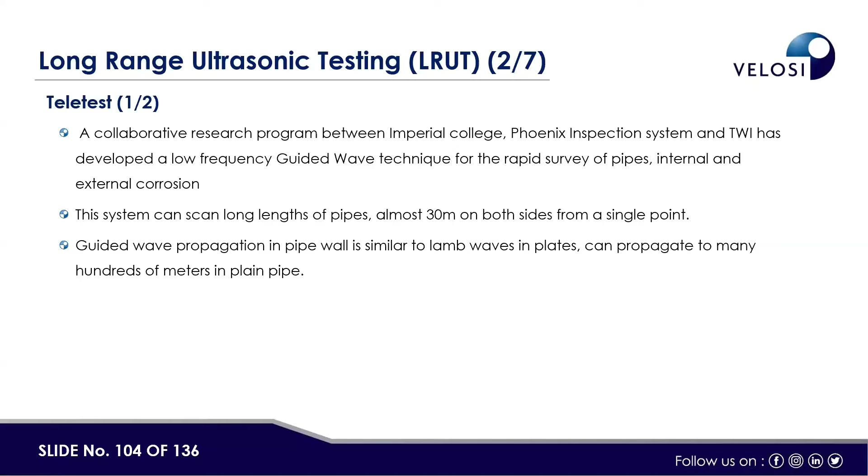It works with very low frequency ultrasound, normally in the tens of kilohertz range, so it has very high penetration power, which helps it attain very long range testing regimes. Personally, I have tested almost half a kilometer in a single shot with a guided wave system, but that is not uniformly equal for any given situation.

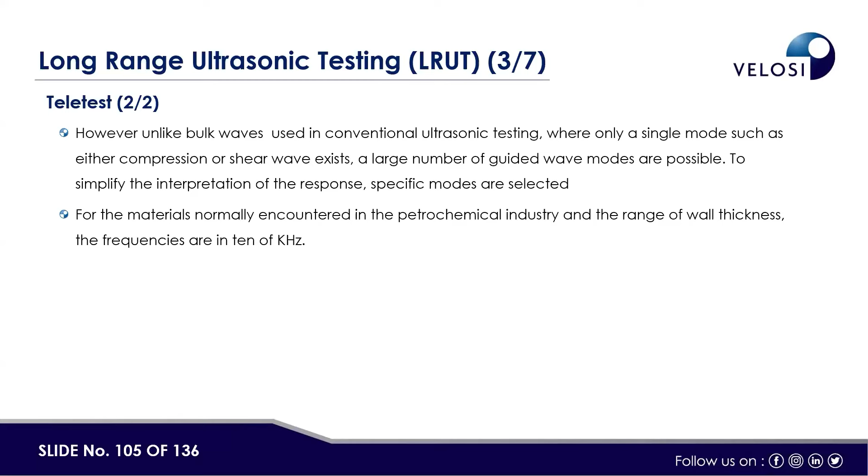Equipment is now available commercially, but it is very costly. So developing and maintaining the capability of getting LRUT done has a significant cost impact. You have to have financial capital, and you have to have very capable, highly skilled human resources to maintain and operate that system. Otherwise, you're going to lose it in a couple of jobs.

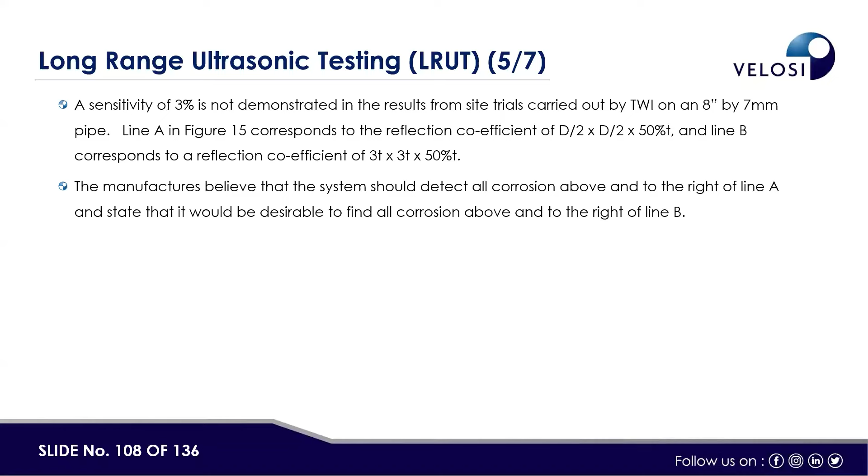As little as 3% cross section change is detected by the system, and usually the reporting threshold is set at 9%, so changes above 9% are reported to the client. Usually changes of 23% and above are followed up with a complementary technique to calculate and establish the remaining thickness at that specific location.

Advantages of LRUT are that it's rapid and very fast in terms of screening. It provides you with areas of concern with high efficiency. You can run through kilometers upon kilometers of pipe work in a single day, and then you can target specific regions based on the results of your LRUT for accurate remaining life assessments.

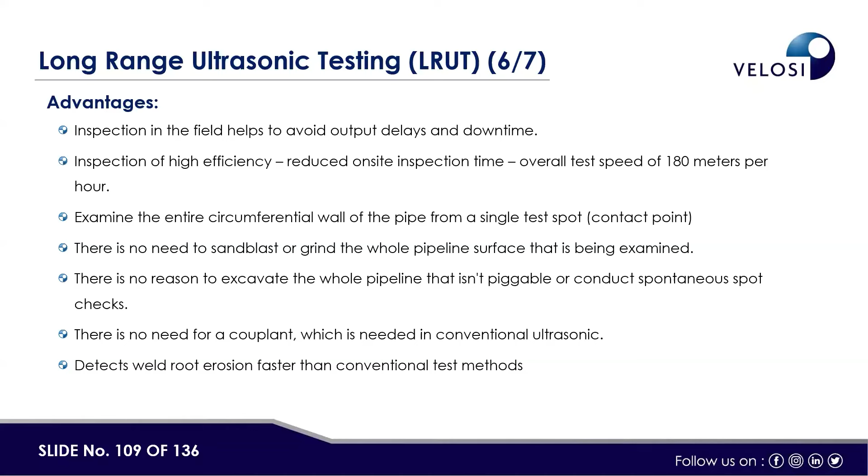It cannot detect an isolated pit. Yes, it is designed to detect some area of concern, and area by definition means there has to be some length, width, and height for it to be detected by LRUT. For cost and time effectiveness, a minimum length of 5 meters is required. It can be tested up to the tubing thickness and tubing diameters, and 100% of the circumference of the pipework is screened for wall loss.

So the next is our phased array. Let me put one thing into your perspective as we begin with phased arrays. Phased array is no more than conventional UT testing, but in conventional UT setup, we have got one instrument with one probe having one element at a fixed angle, and you have to deal with it. But when you come to the phased arrays world, you will have to handle up to hundreds of systems in terms of availability. Depends upon the probe you are using and the setup, but you can have hundreds of elements at one given time, generating hundreds of different angles at one given time, and generating a combined image of all those testing parameters for your given application.

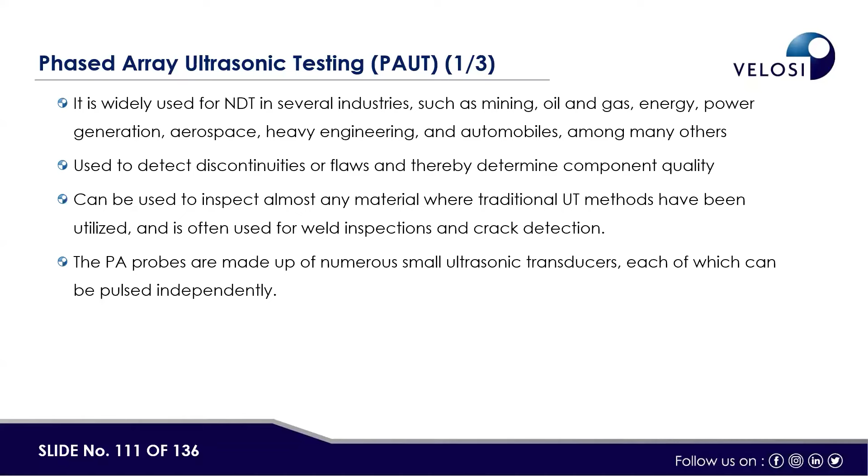Handling hundreds of probes at a given time required so much computation power and data processing power that it was impossible to do without the help of computer processing power available nowadays. And as soon as we have got computers in our hands, ultrasonic testing started to revolutionize, first in the form of phased arrays, and now in the form of TFM and full matrix capture, FMC and TFM sort of applications. So the fundamental principle is the same as it is for conventional shear wave testing or longitudinal wave testing, straight beam testing, but that is operating with one element at a time. This system is now operating with hundreds of elements at a given time.

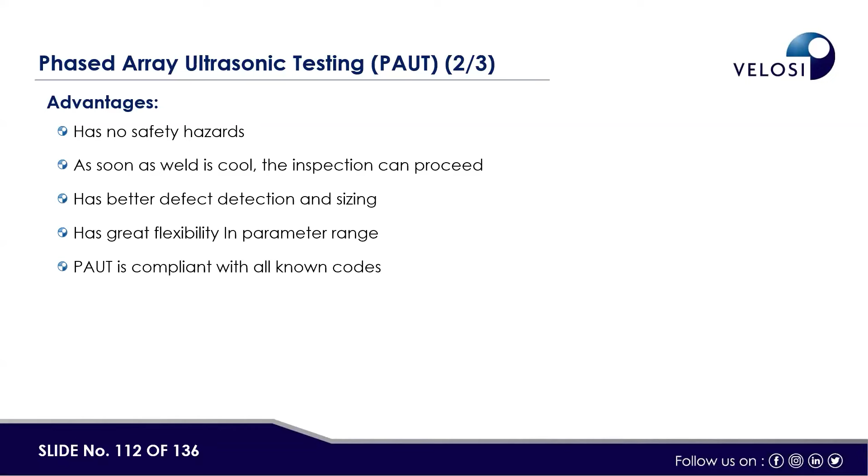It has no safety hazard as it is operating ultrasonics. You can proceed with the inspection as soon as the weld is cool. It has better defect detection and sizing capability as it is operating with so many different angles at a given time. If one angle is missing something, the other would see it. It has great flexibility in parameter range. Yes, you can make your system generate whatever parameters you want, obviously those have to be within the realm of practical possibility. PAUT is compliant with all known codes and standards. Yes, it is compliant with absolutely all codes and standards as of today.

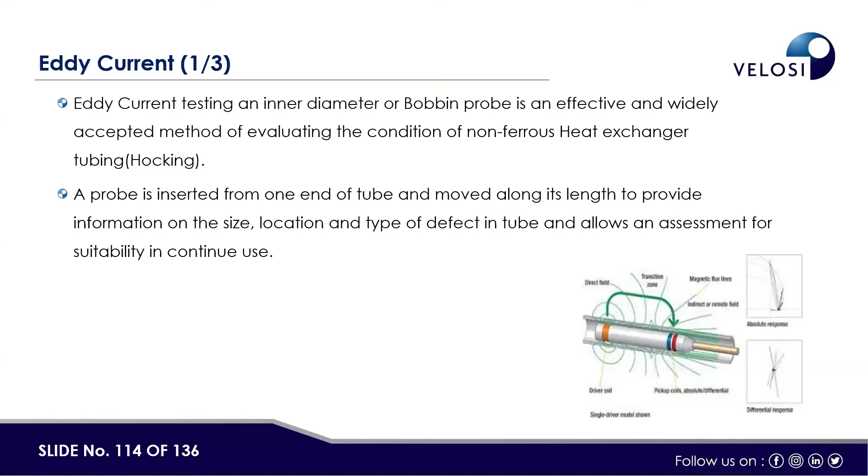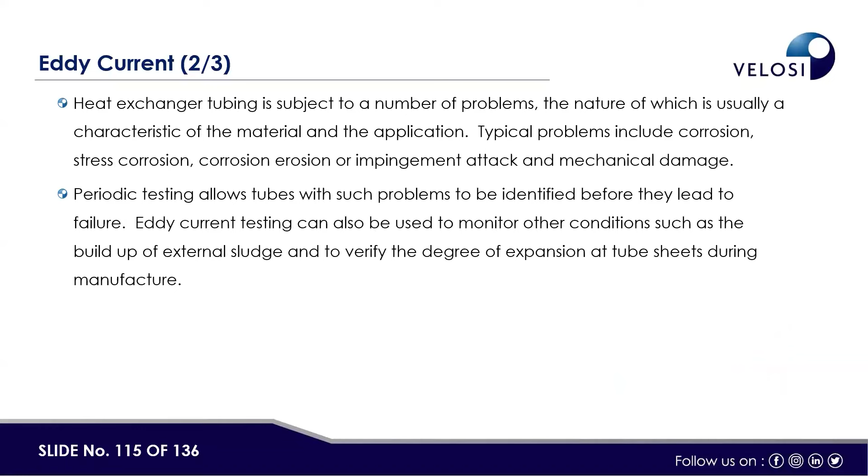The next is our eddy current testing. Eddy current surface testing, as we have gone through, is the same phenomenon, but this time the probe is shaped into the form of a bobbin coil, which is inserted into a tube-like object for assessment of the health of boiler tubes, heat exchanger tubes, and other tubing structures. It's used for heat exchanger tubing inspection, periodic testing of elbows of the boilers, for damage mechanisms which could lead to failure.

There are some limitations of eddy current tubing inspection. It does not do well with magnetic materials or electrically non-conductive materials. So you have to have non-ferromagnetic, electrically conductive materials. However, some new techniques such as IRIS, which is ultrasonic based, or NFT, near field testing, or eddy current biased testing, are some of the newer techniques which could be applied to overcome these limitations for specific applications. Remote field eddy current testing is one of the prime examples of overcoming those limitations.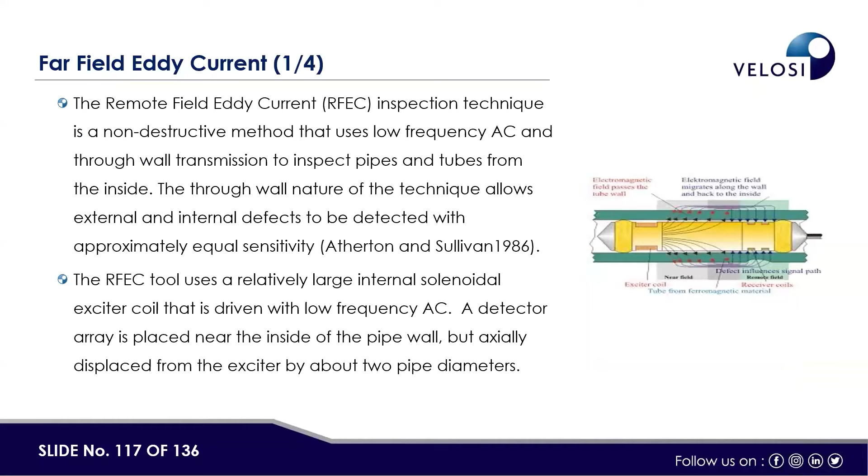So the latest into the world of eddy current testing is pulsed eddy current. So we first had phased arrays in ultrasonic testing, where we had multiple elements doing different things at the same time, and then combining all those different results into one big picture by the power of computer. Then we have got the same thing going for eddy current testing.

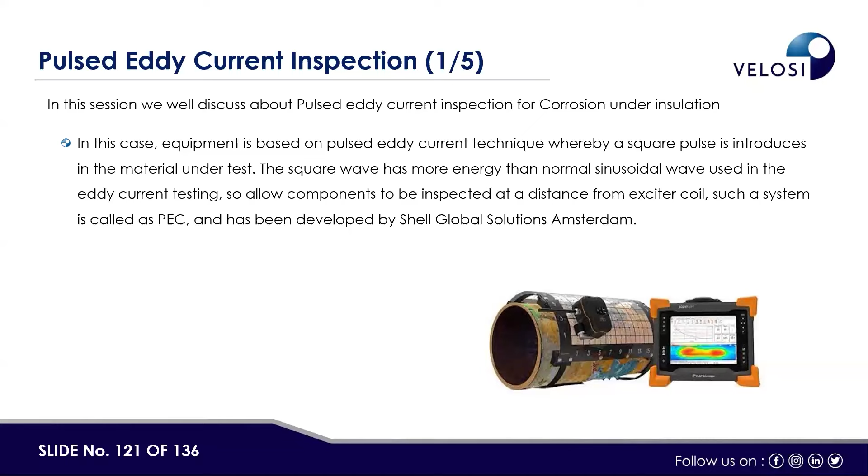Earlier we had single equipment with single probe doing single thing at a given time. Now we have an array of probes with multiple elements or coils inside it doing multiple things at a given time, and then we combine all those testing parameters into one big picture to give our clients and our users a bigger picture of the damage mechanism, if applicable to their asset.

It is very easy to use. Equipment is very portable. It takes less than 5 seconds to give a measurement. It can measure wall thickness through insulation and coating up to 120 millimeter thick. It can measure wall thicknesses from 3 mm to 30 mm. Obviously, above 30 mm, the penetration limitation kicks in.

It is not very sensitive to very localized defects. However, for large area damages such as corrosion under insulation, which usually affects a large area of any given asset, this can map the damage and give you results so that you can plan your maintenance run.

Similar to eddy current testing, it has a probe coil. It has a magnetic field induced into the ferromagnetic material. Then there are eddy currents generated into the ferromagnetic material, which in turn generate their own magnetic field, which resists the induced magnetic field, producing a balance between the net magnetic field, which is called inductive reactance. That balance for a given sound material is constant.

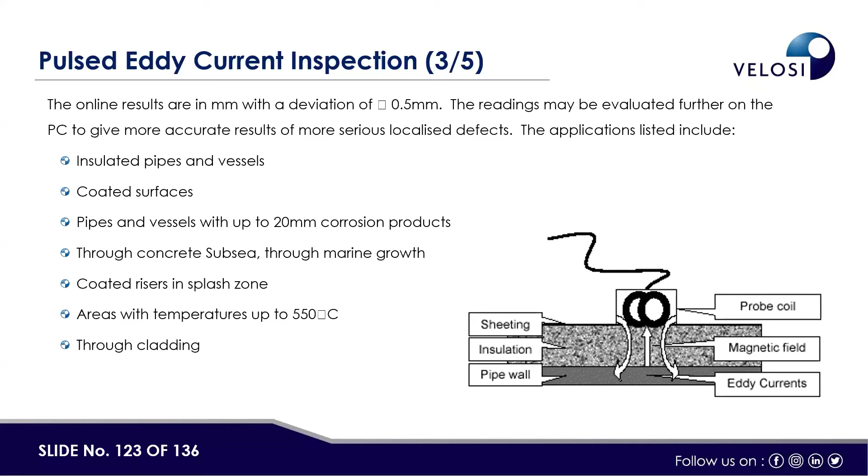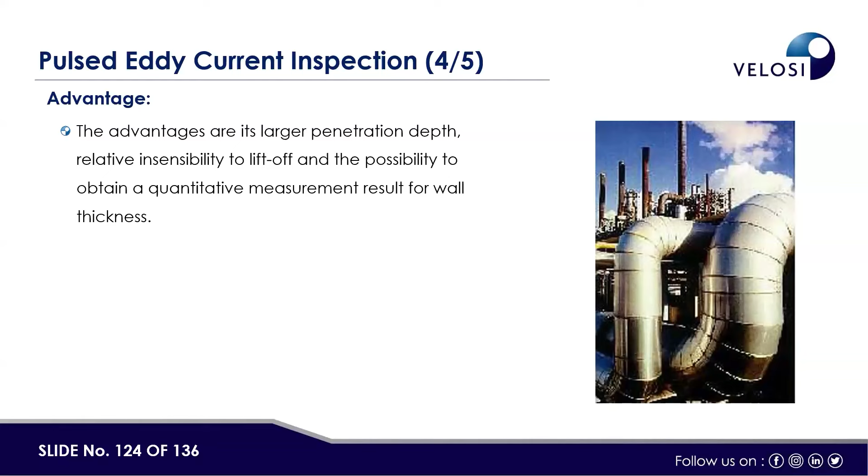And if that balance is disturbed by the presence of any defect, this imbalance is then calculated, evaluated and interpreted into the presence of defect and then used to size it. Pulse eddy current inspection advantages are its larger penetration depth through the insulation material. You do not need to remove the insulation to ascertain if there is any presence of CUI or not. It can do that for you without removal of insulation.

As we have gone through already, the wall thickness limitation is between 3 to 30 mm. Standoff you need is 120 mm. Cladding must be less than 7 mm in thickness. It cannot be performed on difficult geometries because you need references to move along. Cannot specify if internal or external wall loss. It only monitors the wall loss. It cannot differentiate if the wall loss is internal or external.

It cannot detect small but deep defects. It cannot detect the isolated pitting. It is not suitable also for the areas which are exposed to excessive vibrations.

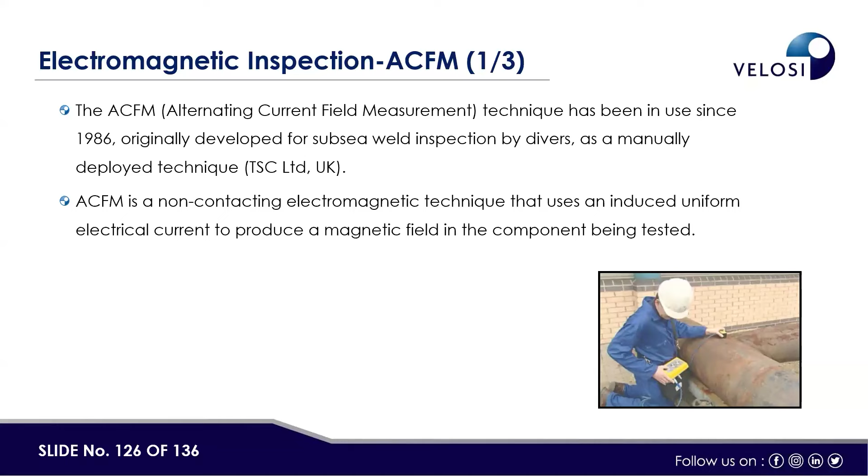Alternating current field measurement technique, it's also an electromagnetic technique, which is a non-contact method. So principally a uniform electrical current is induced into the product, and then a resultant magnetic field is produced. This technique has some advantages associated to it. It is a sizing technique based on mathematical modeling of the surface magnetic field. It is able to determine defect depth without calibration.

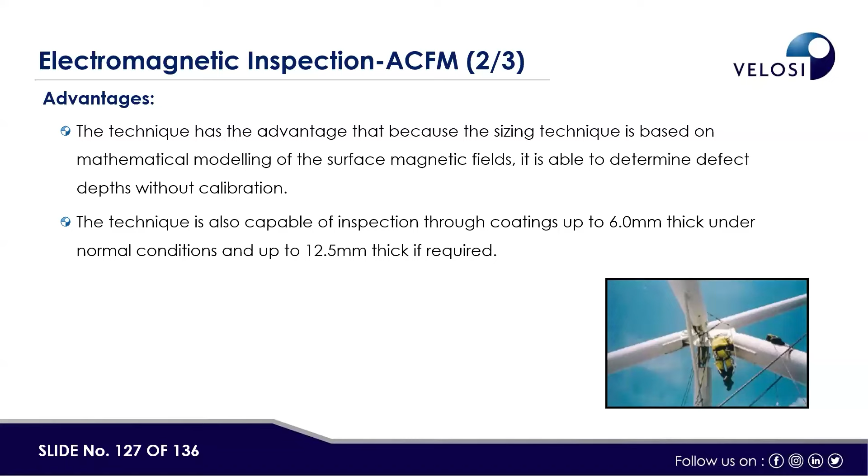The technique is also capable of inspecting through coating up to 6 mm thick under normal conditions, up to 12.5 mm thick if required, obviously with special tools and tackles and special setups. Currently, it can only work on steel. The length assessment is not very accurate when sizing cracks.

It is still model based, so a chart based on a recognized defect is used. After that, it can be used to translate ACFM indication depth into true depth. A model is generated. It is not actual. It is modeled. So it could be off by quite some margin. Its sizing models perform well on the cracks, but other damage mechanisms could not be sized that effectively.

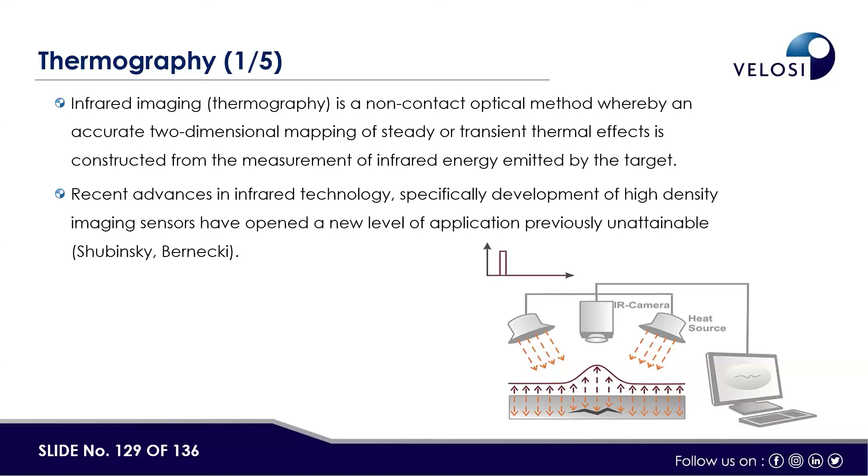Then we have IR thermography, infrared thermal imaging. This technique detects any thermal gradients being radiated from a source of heat or from artificially heated objects. In IR testing, we usually see thermal gradients coming out of heated objects in the form of infrared spectrum emission. So we have specialized cameras and specialized filters designed for that, which detect IR emissions, and based on the intensity of the emissions,

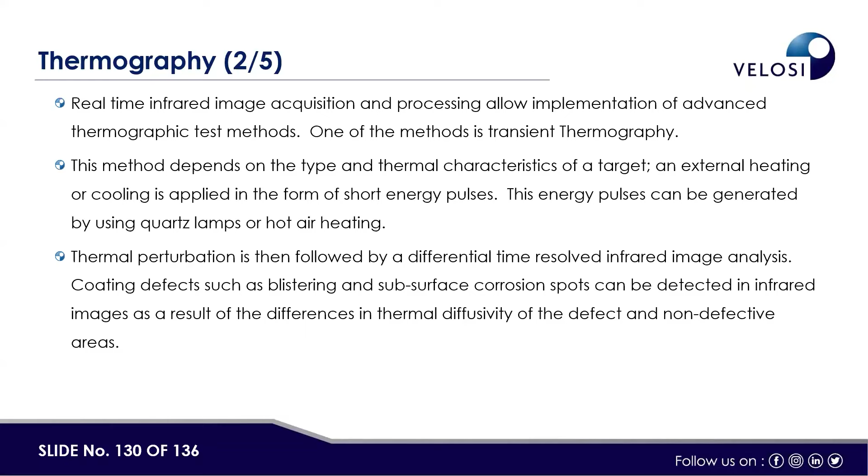we can calculate and we can measure the actual temperature of the test object, and then use that information to come up with the planned maintenance of that object.

Advantages. The main advantage of infrared thermography over destructive testing methods is that it can rapidly scan vast areas for any potential point source of IR emission, and then that specific point could be targeted for mitigative action. The instrument is very risk-free. It does not emit any radiation of its own. It is very portable. You can take it anywhere.

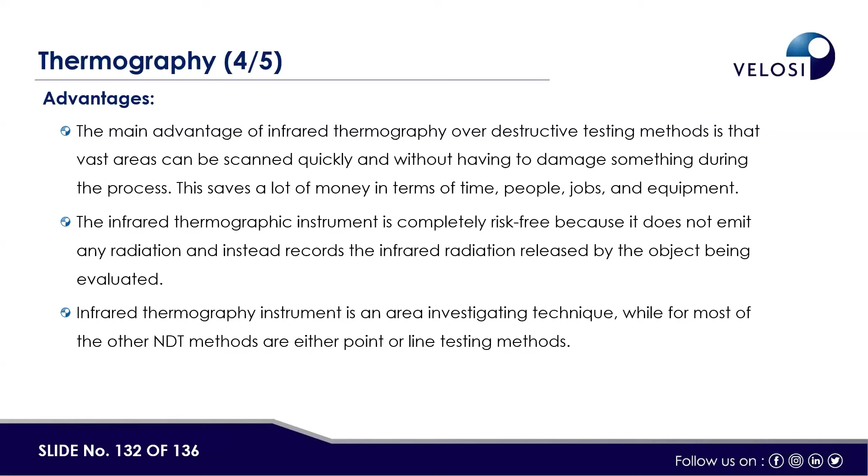There are some operational or environmental operability limitations from the manufacturer, and that is usually within the limits of what we usually see in our industries. So it is applicable in almost any environment, since every other NDT method so far had some limitations.

So thermography is not exempted from that. It employs infrared equipment. It cannot penetrate great depths, only a few millimeters, because infrared radiation does not penetrate very much. That part of the light spectrum is very weak. Finally,

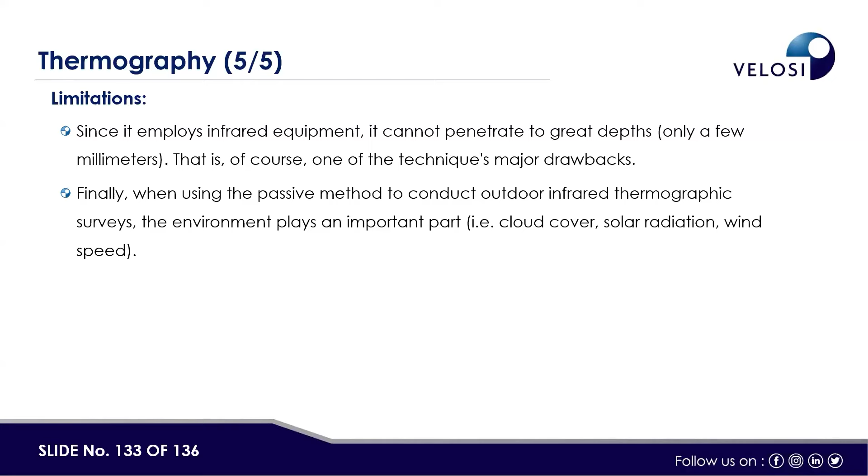when you are conducting outdoor infrared thermographic surveys, the environment plays an important part, because everything is radiating IR. So you can have influence from all sources of IR emission in your environment, and you have to be very careful what you are reporting when you are doing IR thermography.

The advantage it offers over more conventional NDT techniques is that it results directly from the process of flaw growth. If a flaw is present and it is growing with the stress being introduced, it provides you with the alarm. It has some limitations associated. Some normally occurring phenomena, such as scaling and deposits, also generate an AE signature, which oftentimes confuses the interpreter or operator when he is evaluating the result.

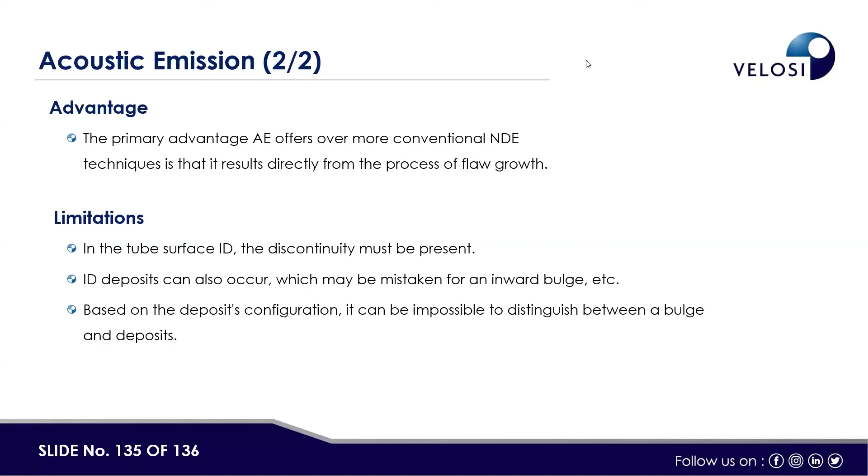Okay, due to lack of time, we will only be entertaining around 3 questions, maybe 4. So let's start with Mr. Kashtif Mushtaq. Mr. Kashtif, are you still there? Can you please ask your question? Unmute your mic, please. Mr. Kashtif Mushtaq. Can you hear me now? Yes. Yes, I can hear you.

All right, that's great. First of all, thank you very much for this very informative webinar, which provided us an opportunity to have more visibility on the constellation of different NDT tests, conventional and advanced. As written in the question and answer text box, I need to understand how you plan the mix of tests required for a specific asset, and how you start that.

What kind of checklist do you go through, and then afterwards decide that these are the conventional tests and these are the advanced tests we need to conduct in order to reach some recommendations, or before recommendations, the observations themselves? And how do you relate these results or recommendations to the sustainability goals of the client? How does it impact the energy efficiency and carbon footprint reduction of an asset? Thank you.